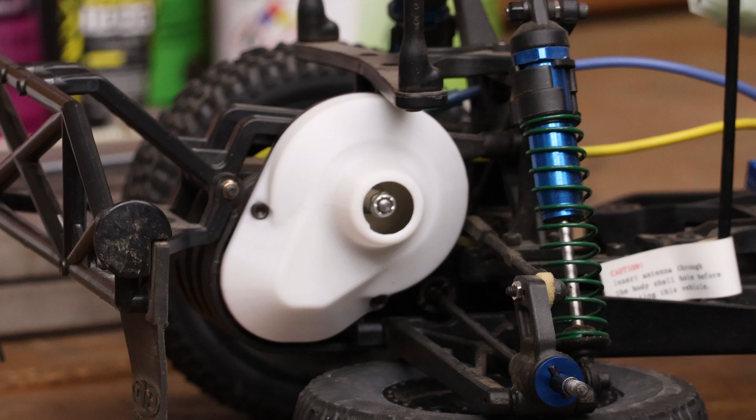So in this video, we are jumping into Fusion. We're going to be doing the CAD portion of our design, getting a 3D part that we can print, and then put it back on this RC10 truck. Now this is probably a tricky part, and I get a lot of comments about how do I reverse engineer this part. And when we're looking at scan data, it can sometimes be a little tricky. So what we're doing today is we're not reverse engineering a part, but we are going to design a part that fits and replaces the original.

Now, it might seem like we don't need to get a fully detailed or a highly detailed scan when we're doing something like this, but to have the best data possible when we go into CAD is always helpful. So we're going to be diving in, we're going to be making our new part, and at the very end of this, we'll put it on the truck and cross our fingers and hope it fits. So without further ado, let's go ahead and hop into Fusion and start modeling.

All right, so now we're in Fusion and we're going to begin modeling a cover. One of the benefits that we have here is that we're not trying to exactly replicate the cover because we have one. We don't need to. So we can use it as a guide and make sure that we have enough room or clearance for all the things underneath it. Now, luckily for us, these covers are actually pretty loose in tolerance. There's no seal or gasket or anything. It keeps dust out, but it's not going to keep water or anything from really getting in there.

So we're just going to use it as a loose guide, and we'll start by going to our mesh tools and inserting a mesh, selecting from the computer, and finding the OBJ. So again, we can use OBJ, we can use an STL or 3MF. We cannot use the PLY, so make sure that if you are using RevoScan that you don't save it as a PLY if you're planning on bringing it into Fusion. While we can use PLYs for certain things, the inserting a mesh is not one of them.

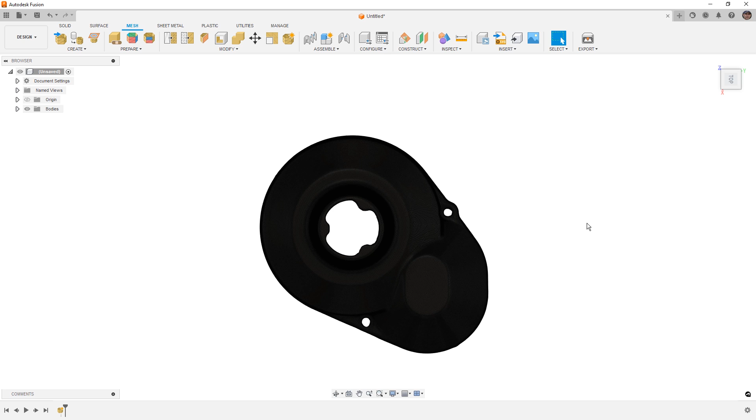Now, in reality, you would want to make sure that you have it perfectly aligned to your coordinate system. Because this part is revolved, this portion here, we would want to be centered about the origin. And this bottom edge is essentially flat. So if we look at it from the top, we would want this edge to be horizontal, or some orientation of that. I'm going to hit Control and 4 on the keyboard to get rid of my edge display, just so we can see what's going on.

So right now, this edge is essentially vertical. This is essentially vertical. And this is roughly the orientation that it is on the truck. So we can either keep it like this, but center this about the origin, or we can try to rotate it so that this bottom edge is straight. Either is perfectly fine. But I'm going to turn my origin on, see where it is.

And I'm also going to create a new sketch. Now, the reason I want to create a new sketch on this top plane is this is going to give me some references. So I'm going to put a circle here. I don't really care what the size is. And I'm also going to put a horizontal line.

Now, if you want to follow along, I am going to include a Fusion file in the description of the video here that has the mesh inserted, but not rotated or moved at all. So if you're trying to follow along with this, you can. My guess is you're probably not going to, but feel free to if you want.

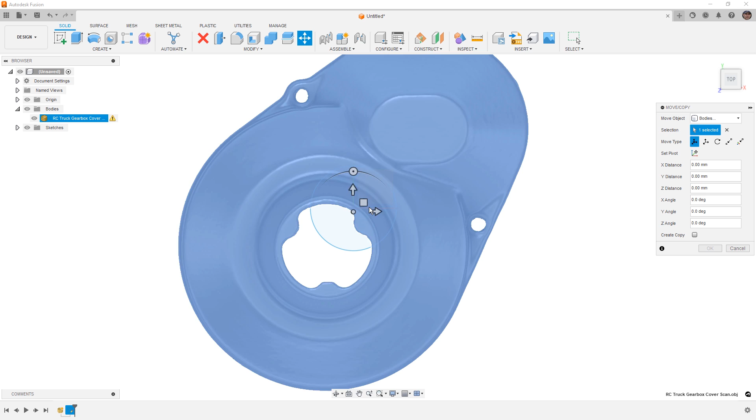So what I'm going to do with this line is I'm going to drag it up and see how well it aligns here. And it actually looks pretty darn good. And I'm going to drag this one up and see how that aligns. And that actually looks pretty good as well. So I think with this orientation, I'm going to go ahead and keep it, but I do want to move the mesh. So what I'm going to do is go to Bodies, select this, and use Move Copy. And I want to move it so that that circle is essentially centered on that object.

Doesn't have to be perfect. Again, with RC cars, the tolerances are fairly loose. All the suspension pivots and all that stuff, they have a lot of play in them. It's not like we're designing a highly engineered part here, but this is going to get us close enough.

And the main reason that we want to do this, and I can go back and delete that sketch. I actually don't really need it. We didn't attach to it at all. We only used it for a visual reference, so I don't need to keep it in the design. But now we have our object centered at the origin. Now there's another part to this that we need to make sure we understand. It's not really in the right location.

We have our coordinate system here, but again, I'm going to create a sketch. I'm going to use a horizontal line, and I'm going to put this as a midpoint at the origin. And again, I'm just going to use it as a loose reference, move copy, and bring this down. And the main thing I'm looking for here is I want to make sure that the bottom is flat, and right now it's not. You can see that it's just going below here and it's just above here.

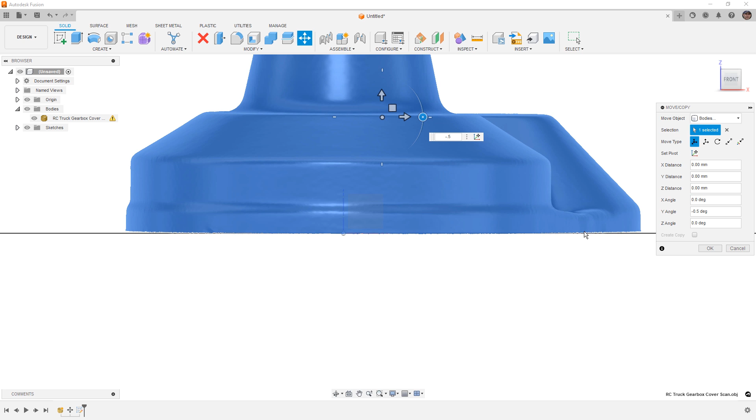So one thing we can do is we can rotate it. I'm going to try to go a full degree, and it looks like negative, and that's a bit too much. So we can try negative half a degree, and let's make sure we got a negative here. And that looks pretty good. You can see the cut's not perfect, but that actually looks pretty consistent here. So I'm going to say okay. And I don't need that sketch anymore.

And I'm going to do this one more time. So from this view, I'm going to go ahead and create a line. Again, horizontal. Select the origin, make it midpoint. And then we're going to select our object and say move copy. Now for this one, I'm actually going to reset the pivot point at the origin because I don't want it to be rotating about some point up here. I want it to be rotating about where it's touching or crossing the origin.

So if I try half a degree here, again, it looks like it's negative. That gets me pretty close. So from that orientation, it looks pretty good. From this orientation, it should still look pretty good. Remember, we did kind of a manual cut across the bottom, so it's not going to be perfect, but this at least gets us pretty close. So I'm going to turn my origin back off. Now the object is centered, and we can move forward with our design.

So I'm going to do a quick save, and I need to pick the right location. And we're going to call this RC Truck Gearbox Cover Design. So now that it's here, there are a couple things that we can do. We can use things like mesh section sketches, and we can get information off of this. But again, the only thing we need this for is just sort of a rough approximation.

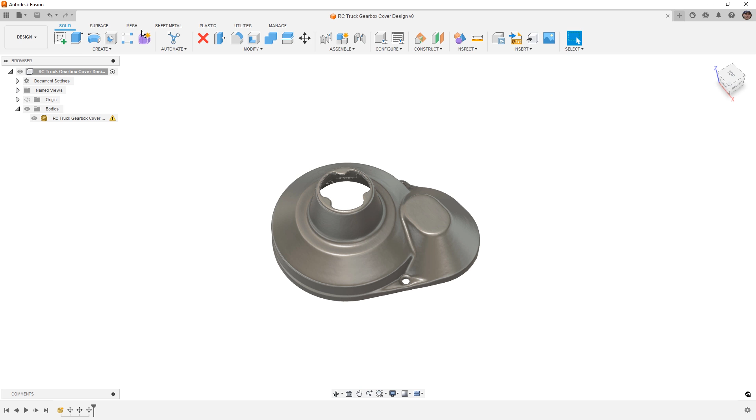So the only thing we might want to use a mesh section sketch for is actually where this intersects with the bottom plane. So on our mesh tools, we're going to create a mesh section sketch off of this body. For the section plane, I'm actually going to go to my origin and select that bottom plane, which is not going to intersect the object because again, it's just barely above.

But if we pull this up just slightly, that should give us a nice section that we can then create a mesh section sketch and apply some things like lines and arcs to them. And then we can push that down to our plane. So what we're going to do is I'm going to hide that. I'm going to go into my sketches, and I want to edit this sketch. Then I can go to Create, Fit Curves to Mesh Section Sketch.

This is where one of our bolts is. So you can see that right there. And this is the other location. It's got a little bit of a bump there. Kind of see that. And the main thing I want to do is I'm going to try to fit a circle to this, and you'll notice that it's not working because it thinks that it needs an entire circle here.

So then we're going to switch to arc, and we can maybe start somewhere about here and put it on there. And that should give us an arc. We can do it again on the other side if we want. But if we hide our mesh section, we should have an arc. And you can see how close that center point of the arcs are to the origin. So that's a pretty good sign.

So again, this is going to be a loose approximation, but we can use these tools such as fit curves for a straight line, and we can put maybe a straight line over here, and we can do another one. So we'll say, okay, we'll repeat that command, and we'll maybe do another line here. Okay, we'll repeat that command, and then we'll do an arc. Maybe we'll just do an arc section up here.

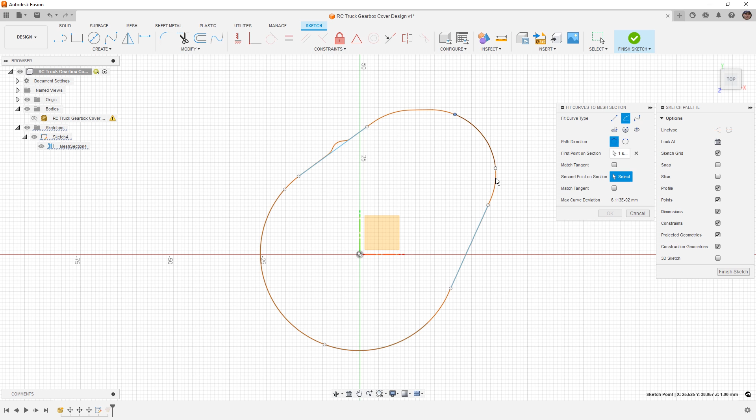And again, if I hide the mesh section sketch, now what I'm starting to do is build that profile, build that outline. Now, if we bring our mesh back, we do have a flat spot right here. So we might want to use a straight line and just try to fit a straight line here and say, okay. Now, this is obviously not the full profile, but the benefit of doing this is now we can do things like extend this out. We can extend all these lines out further, especially if we lock them in place.

So if you select the line and use the lock, and we'll do the same thing here, and we hit escape, that leaves the endpoints free and we can carry them out. So we can sort of pull these out. We can do this one here and this one here. And then if we bring our mesh back, you should see that those straight line sections are now in line with the rest of the geometry.

Now with the holes, these are relatively small. Again, they're about 2.75, 2.8 millimeters, about 0.11 inches. We can do a mesh section sketch and try to fit something there. But in reality, again, with the loose tolerances for what we're dealing with, we can probably just visually get it close. And I'll do the same thing down here. Now, for a higher tolerance part, we would definitely want to measure it. But for this part, I think we're okay. Again, I measured it at about 2.8 millimeters.

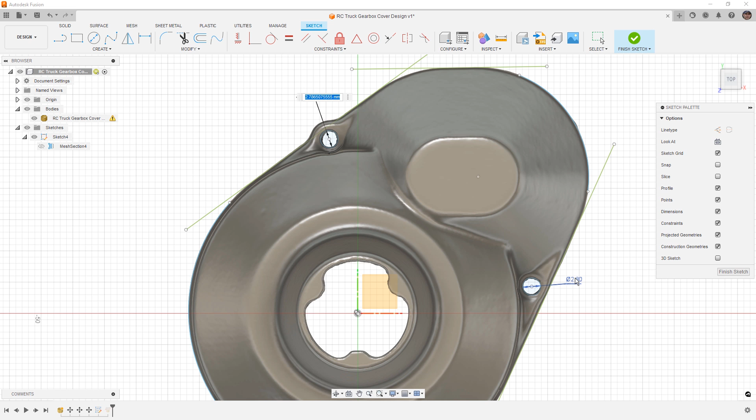And we'll do the same thing up here. I'm going to make this equal to this one because they are the same. And just make sure that they're sort of in the right location. And once I'm happy with their location, I'm going to fix its center point. And same thing down here. I'm going to go ahead and move it around just till I'm happy with it and then fix its center point. And once again, this is just going to be the starting point for our shape. We can always add more to it.

I also want to include this sort of slotted section here. We're going to have to create a plane for where that goes. That's something that we're going to have to do for this upper section as well as maybe where this lip is. But for right now, I just want to include that geometry. So I'm going to go to Create, Slot, and a center slot. I'm just going to manually pick where the centers are and drag it out. And then just move it around until I'm happy with its shape and its location.

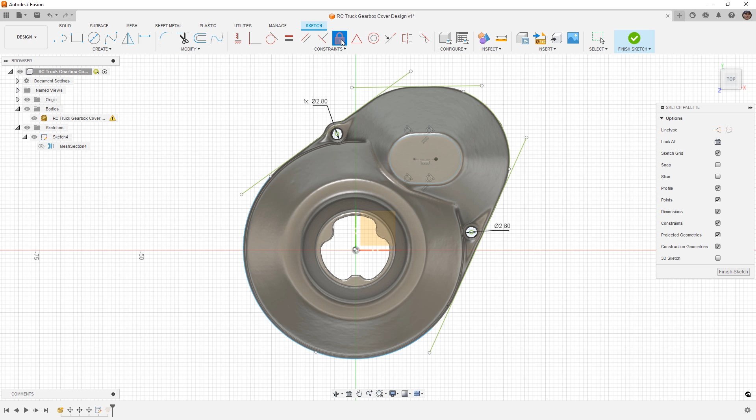You can see this point here is the center point of that arc. So in reality, those two things should be at the same location, and you can see that it's pretty close. So even though we are manually moving things around, we are pretty close to our mark. It's also a good idea for us to lock these in place. When you use mesh section sketches, they are not going to be constrained to anything. A mesh section sketch is essentially just taking a snapshot of where that is in space, and that's what you get. So fixing those in space, even if you allow the ends to float around, is a good rule.

Now, obviously, when we design this, we want these to be tangent, but right now, these are just references for us that we can use to know where things like straight edges are going to be. For right now, I'm not worried about that. The only thing I'm concerned about is the hole locations and some of these other sort of obscure references.

So we're going to put a circle here. I'm going to make sure the circle is at the origin and it's not snapped to some of those others, because we're going to make sure that those other references are truly concentric. And we're going to go to the outside, which will be the outside of that fillet. And it's not perfectly centered, but it's pretty close. I think it's close enough for what we need.

What we could do is move the entire object a little bit more if needed, or instead of having it concentric with the origin, which we just visually sort of positioned it based on that, we could use one of these center points, for example, that one, and see if that's any closer. And use the same center point and bring this one out. And it actually looks a bit closer, so I'm going to use that.

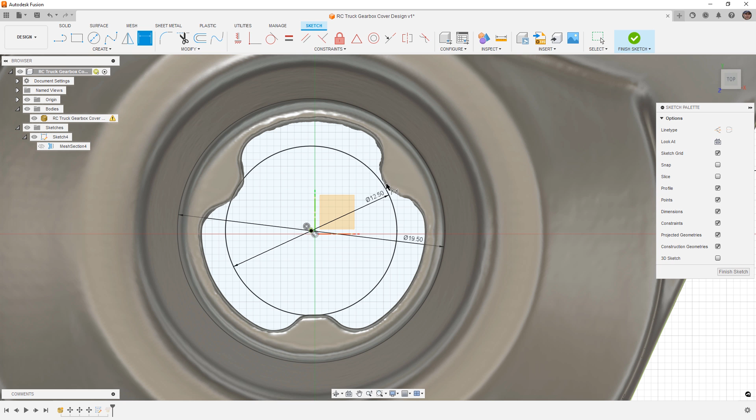I'm going to give it a dimension. 19.5 seems like a good number. And if I can type it in right, we'll say 19.5. This ID for that plug that's going to go in there is going to be about 12.75, maybe 12.5. It's a pretty loose fitting plug, so we only need to worry about the minimum diameter here, the inside diameter, and that's going to be fine.

We could also add a couple of additional references just so we have them in a single sketch. So maybe to this point, it's the outside of that root fillet, and maybe another one to where that face is, and then call that good. So once again, I'm just going to give these diameters, looks like about 27 millimeters, and this one's about 33. Doesn't need to be perfect because, again, we're making our own design, so we don't need it to match.

And the last thing I want to do is give this some dimensions. So 5.75 and maybe an overall length here, 5 millimeters, it seems about right. And I'm happy with that. It's going to be just inside of that fillet. So in reality, that might be 6 millimeters. Now we'd go to the outside of the fillet. Yeah, it looks pretty good. So that's going to be our rough process.

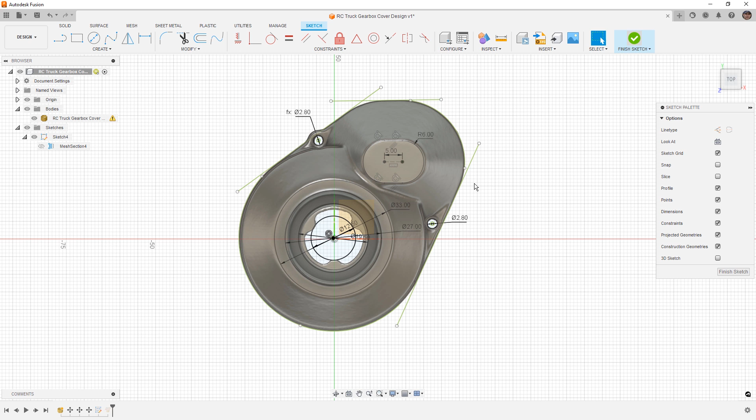I get a lot of questions on how to reverse engineer parts. I would not call this traditional reverse engineering because we're creating an object that just needs to fit in a certain location, but it's not highly toleranced. Now, if this was highly toleranced, what I would do is I would make sure this bottom edge is flat. I would make sure that I had precise locations for those holes.

But because I know that we're talking about loose tolerances, a plastic part that can flex a little bit, and knowing that it's not sealing really anything, there's no gasket or anything that goes on the bottom of this, this is going to be good enough for what we're doing. And I'd probably say for the vast majority of parts that people are trying to create or reverse engineer, this is probably good enough as well, because 3D printing has its own tolerances, and by the time we actually get in to create something like this, those tolerances are going to be lost once we're printing something. So just keep that in mind.

Now, the next step in this process, in order for us to make planes that are actually snapped to something, we would need to go into direct edit mode. Now, we don't have to do this, but I'm just going to at least mention it or show it because in a lot of cases it is pretty helpful. When we go into direct edit mode, this gives us access to actually select individual vertices and triangles. So if we're trying to make a plane, let's say a plane through 3 points, we can select 3 points on this face, and that gives us a plane.

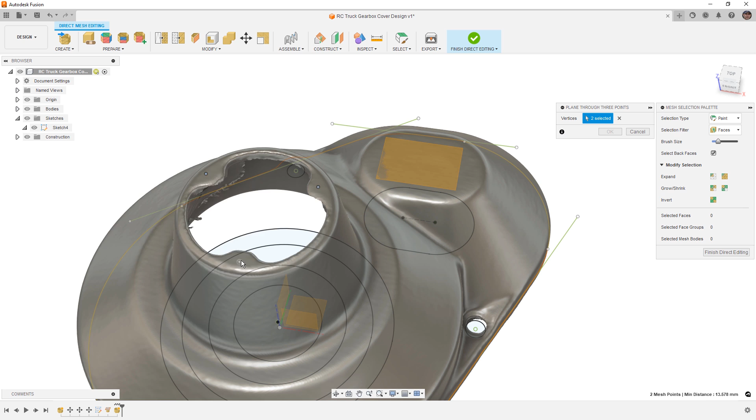Now, the downside to this is that plane is not going to be parallel with our default XY plane. It might be relatively close, but it's probably not going to be perfect. And same thing if we make a plane off the top here. Go ahead and select those. Now we have a plane for the top, probably not going to be perfect. For what we're doing here with this part, it's likely fine for us to just visually estimate where these planes are.

This section here is kind of tapered, so it's probably not going to give me a great result, but that's the process that I would go through if I needed those reference planes. Now, a true mesh editing software, which Fusion is not, we do have direct modeling tools and editing tools for mesh bodies, but a true piece of software that is meant to deal with scan data like this will have options for you to select points and make a plane parallel to another plane.

So for example, if we bring back our XY plane, so we've got that XY plane there, and we measure between that and this plane, you can see that we're about half a degree off. Now, in reality, that is very small. That half a degree is probably fine, but it is a compounding issue because if we go from that plane to the top plane, we're another 0.3 degrees off. And if we take a look at that plane down to another plane, these are just sort of compounding issues. So we're going to eventually get to a point where we're just going to be kind of off with these.

One of the benefits that we have here, though, is now we can say measure from a point, let's say the origin, up to this plane, and we can get a distance. Even though the plane is not perfectly parallel with the bottom, we can say, all right, well, it looks like we're at about 29 millimeters. So we can, with pretty good confidence, say that the overall part is probably 29 millimeters tall. Because 28.799, based on our references, probably 29 to 30 millimeters tall. We can measure it, of course, with calipers, but sometimes you don't have that option because the object's too big or too bulky or just can't measure it. But in this case, that gives us a good reference.

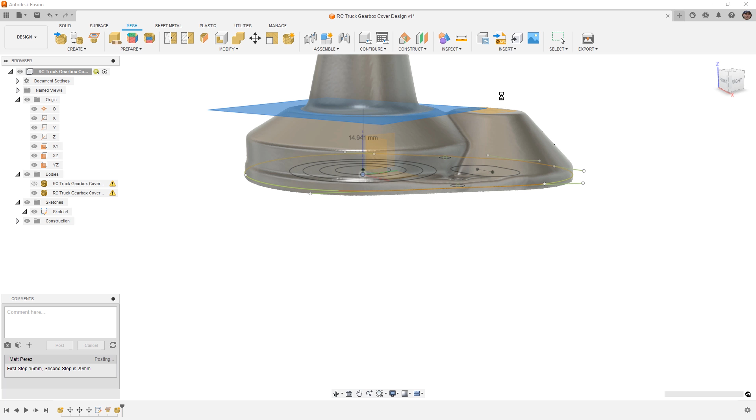So let's go ahead and just do one more quick measure. So again, from the origin point up to this plane, I'm going to hold down the left mouse button because that plane is just under that top mesh. And it looks like 15, so it's a little bit under, but it could just be based on my selection. But that does appear to be just slightly under. So I'm going to go ahead and put ground to face. I'm going to call that 14 millimeters and post that. So it's just nice to have those comments in there, especially when we need to measure stuff.

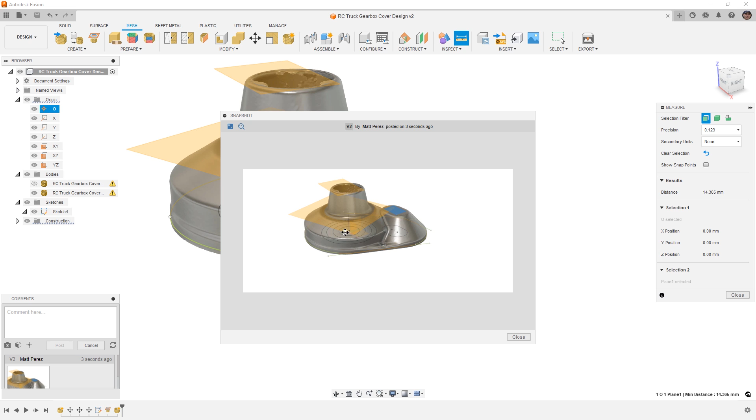When you're making comments in Fusion, you can also grab a screenshot by clicking on the camera icon. And that way you can do things like see the measurement on the screen. So we've got the plane selected. We've got this selected here. And then we can just say, ground to face 14 millimeters. And then when we post that, we'll have that image that we can go back to and we can click on. And depending on how that was taken, if the numbers are visible, it'll bring that image up. We can zoom into it if we need to and fit to screen. But that's just a good way to keep notes inside of a design in Fusion.

So for us, I'm going to hide all of those. Now that I've got some rough dimensions, I'm going to hide the origins. I personally do not like to model with them on. I know a lot of people do. And I'm going to do a quick save so I can stop rotating this around, and then we will begin to model.

So anytime you're modeling a complex shape, and to get started, I'm going to stick pretty close to some of these original shapes so we can see how it's done. Generally, what I would do is I would start with this lower face. So there's a little bit of a lip here, and I want to model that bottom lip. I want to figure out where that thing is.

So I'm going to start by creating a new sketch. This is going to be on my XY plane or my top plane. I'm going to hide the mesh body, and I'm going to use some of these references. So I don't want to bring all of them in, but I'm going to say project this one, project that one, obviously the holes. I'm not worried about anything on the inside yet, and this arc and this line. And then I can hide that original sketch.

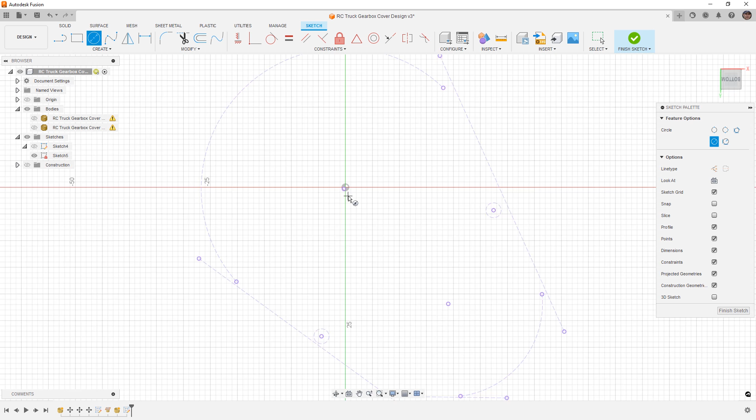And now I've got these. I'm going to grab them, make them all construction, which is X on the keyboard, or you can click construction here. And this is my starting point. Now, obviously, this circle, this arc, did not end up perfectly centered at the origin. And again, that's just because we manually moved it into place. So I'm going to use the center point of that arc, and I want to bring this circle out. This is going to be my reference for adding lines.

I also want to create a circle here. And this is a good starting point. I'm going to create some circles here. So these are going to be snapped exactly to. So I could turn these off. These don't have to be construction, but I'm going to go ahead and make them equal. I'm going to give them a dimension in this sketch of 2.8. Now, because this is going to be a 3D print and tolerance is probably going to be an issue, I can make them a little bit bigger.

And then I'm going to add a second circle, and I'm going to make this one 4.5. If you need to bring the mesh back to get an idea of how big that is, you can see 4.5 is not quite big enough. Let's go ahead and make it 6 millimeters. That looks like it's about right. And then we'll do the same thing over here. Now it looks like this one at about 6 millimeters is a little bit big. So maybe we'll make this one 5, and 5 looks about right.

So basically what I'm looking for is when it hits that edge there, and there is a little bit of a recess here for the head of the screw. That seems to be smaller than 5 millimeters. It's kind of hard to tell, but for our design, we can keep it at 5 and it'll be fine. So with those in play, we'll go ahead and hide this.

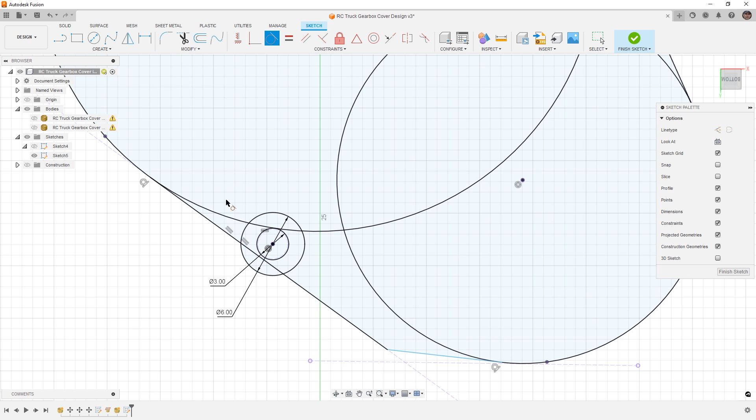I'm going to do the same thing on the other side. Again, I'm just going to snap to the circle. This is a bit different because we've got this horizontal reference. And what I want to do is I want to go to a point out in space, and then I want to go to this circle here. So I'm going to go tangent to this one. I'm going to go tangent to this one. And then I'm going to make this line here horizontal.

And again, what I'm looking for is to be relatively close to those reference lines I brought in. It doesn't have to be perfect. If you want to measure, it's probably going to be less than a degree. Let's say 0.8 degrees. So again, pretty darn close for our loose references. And if we bring this back, that was the straight line, and there looks like there's a large fillet on that corner. That's something we're going to do at the solid level. I'm going to leave the sketch pretty bulky here. And that looks like it's okay.

If we hide this, we now have this pretty big profile here. If you want to clean this up so you don't have to select so many regions, you can. Not really needed in Fusion. And generally when you trim stuff, you'll start to lose references. So you're going to get constraint warnings.

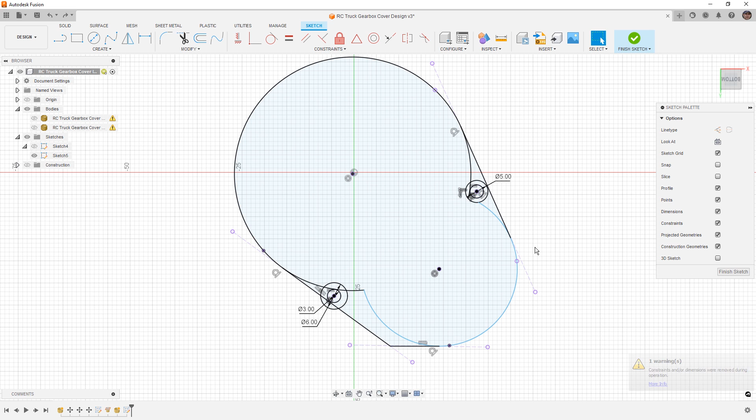And this crosses over so many other little things. So you can see all these little pieces in here. And as soon as we get to a certain point, we're going to start losing those references. So my personal preference is to leave all of those there. If you want to clean this up a bit, I suggest going to the break tool.

So for example, when we use break, it'll allow us to keep all the constraints and all the references, but it'll let us break the lines up basically at their intersections. And what that allows us to do is make it construction. So for example, if I click here and hit escape, that line can now be converted to construction, which means that I don't have to worry about selecting it.

It's a bit of a process to do, and the tool can get hung up, but you may just want to go around and play with that. Again, I don't think it's worth it. I'm okay with just selecting all the profiles, but if you want to, then by all means do that.

So for this, I'm going to bring my design back. I'm going to say extrude, and I want to take all of these sections up. Again, this is where using things like break would be helpful. Make sure that we do select all the regions except for that hole. We want this section as well, section on the outside, and essentially everything but that hole.

Now, if these lines overlap, you do need to pay close attention. We do have a gap there, and we do have a gap there. That looks pretty good. So from the side, we're going to pull this up, and it looks like about 3 millimeters. It's going to be good. I do have my edges off, so Control and 6 will bring the edges back, but that's kind of tough when you're dealing with a mesh.

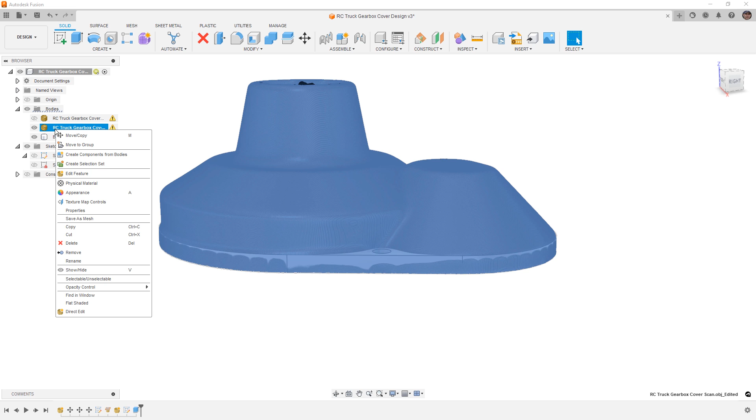One thing you can do to simplify that is go to opacity control and turn the opacity of the mesh down a bit, but it is still very tricky to see. If you don't mind having the edge display off, then you can do that, but the edge display on with mesh bodies can just be a bit much. So I'm going to go ahead and set the opacity back to 100%. But that is one way that you can go about modeling.

One thing I do like to do is change the color of the body. So A on the keyboard for appearance, or you can right click and go to appearance and just make the part that you're designing plastic, translucent, and something that we can see easily. We can go ahead and just drag it on here, make it red. So that way we can kind of see it coming through.

Now, the original body would have been tapered because it's drafted. We don't have to worry about that for 3D printing, but some of these features, like this wall, you can see it's starting to come outside because the original was drafted and tapered. We're going to do a quick save. And then we want to take care of this fillet in the corner.

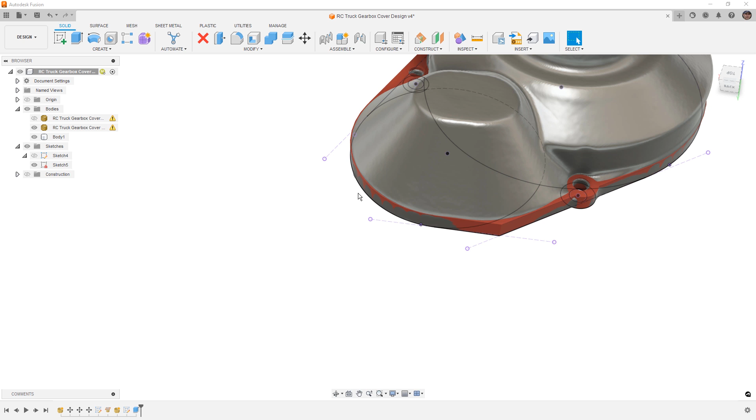So in reality, that's probably going to be the same radius as this, which we didn't actually put a radius value on. If you want to, we can come back in, and I'm going to grab it over here so I know it's right. 17.452. It's pretty obscure. But we're going to add a fillet here. And as we start to drag that in, I'm going to enter 17.452.

One thing that we could also try to do, let's see if this will work. This is untested, but we'll try it. Go back into that feature, and I'm going to click on this dimension, and it won't let me do it. So we'll just leave it at that. So that looks pretty close. Let's go back to home view, and let's make sure we do a quick save.

And remember, initially we talked about how we're not going to replicate this design, and we're going to make our own. Now, this is quite a bit more space than is needed for the clutch setup that's on the RC truck, but I'm going to use this as sort of the bare minimum, because sometimes there are accessories, you can get different clutches and different springs and hardware. So we want to make sure that we don't encroach on the space that is inside of what's here, but we're not going to create the same design.

Now, the base is currently its own solid body, and we're going to keep it that way. But what we want to do is make sure that we have a way that we can reference that geometry. Now, this upper piece here, we're probably going to slap on last. But what I want to do is create basically a surface that is where this is, and just sort of carries across. So the next step for me is going to be to create a plane.

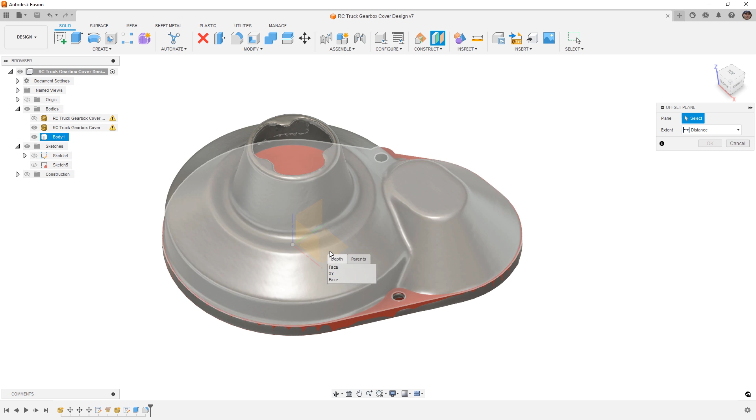I'm going to hold down the left mouse button, select X, Y, and then I want this to come up to, let's see, it's going to be hard, so let's bring the construction folder back on. I want it to be about the location for these, which looks like it's about 15 millimeters. So it'll raise this one up just slightly, make sure all these other ones are hidden, and we'll say okay. So that's going to be a good reference. It's going to be parallel to the base that we created.

Remember that we did hack off a little bit of the bottom of that mesh, but now we can start to build our shape. Now you can do this all with solid tools, but I find that when I'm building complex shapes, I like to go to surface tools because I can work one face at a time. So I'm going to go over to my surface tab, create a new sketch on this plane, and then I need to bring back one of my sketches that has a center reference.

So I'm going to hide the mesh body and hide the solid body for now. And remember, this is just a little bit off, but I want to bring back that reference. So I'm going to make sure that I project it. That's P on the keyboard. And we're going to just create a circle here. You can bring back the original sketch, sketch 4, and I can grab this reference here. So hit escape, bring back sketch 4, double click this, and again, P to project it.

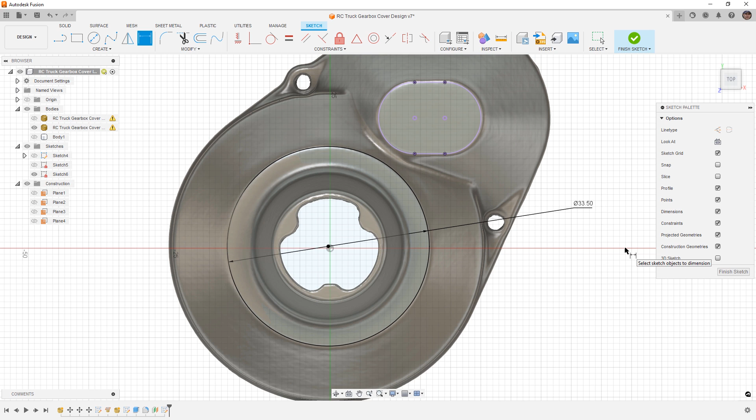And now essentially what we want to do is figure out the size of the shape. Now again, remember, I'm not going to encroach on anything that is smaller than this shape. So I'm going to give it, looks like about 33.5 millimeters. It's going to be the rough size that I need. And now I want to connect these together. So using my line tool, I'm going to go from this one to this one. We'll make this tangent on both sides. And then we're going to do the same thing over here. So just sort of work our way over, make sure that it is connected and tangent, and then we'll use tangent on the back side as well.

So basically what we're going to be doing here is creating a patched surface, a flat surface. Now this can get a little bit tricky when we've got multiple profiles. So if I select patch, I have to select all of these profiles, but when we hit OK, it will be one surface. I'm going to use Control and 6 to bring my edges back. Now we've got a single surface. If I bring back my original thing here, you can see that we've got that surface. I am going to make it a different color. Again, red, so A on the keyboard, just so we can see it a bit better. And this is going to allow me to start building my new shape.

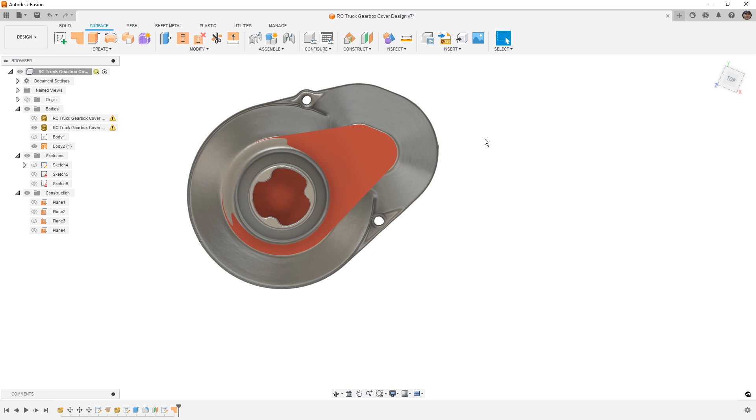Now, the new shape is going to be built on top of that base, the solid, but we're not going to connect to it yet. And the main reason is because we need a thin wall part. Now, when we're 3D printing, we need to think about things like the nozzle size that we have. My machine currently has a 0.4 millimeter nozzle in it, which means I can probably print a 0.2 millimeter wall if I really want to try. Probably not going to go that thin, but that's something that we need to keep in mind. If you're running a 0.6, 0.8 or bigger, you're not going to be able to print those really fine lines. You're going to have to do something a little bit bigger.

So this is the start of our shape. I am going to go back to perspective with ortho. I like to just look at it with perspective a bit better. And I think I'm going to come back and potentially remove those. I have to think about that a little bit. But I want to start by building the outside, and we can always trim some of it away. So looking at our shape, I'm going to bring the solid body back, bring my edges back, so Control and 6.

And we can start by doing something like a loft. We can pick this straight edge here and this straight edge. And I'm just going to keep it like that. If I want to, I can add to the profiles as long as they're connected. So you can see we can start to build that outside shape. We can add to this profile and just kind of play around with it.

We do have the straight section here, but that's not going to work because of this base. We'll have to do something else. And same thing over here. We could actually get away with it on this side over here. And you know what? I'm just going to work my way all the way around with the exception of that side there, just because of that opening.

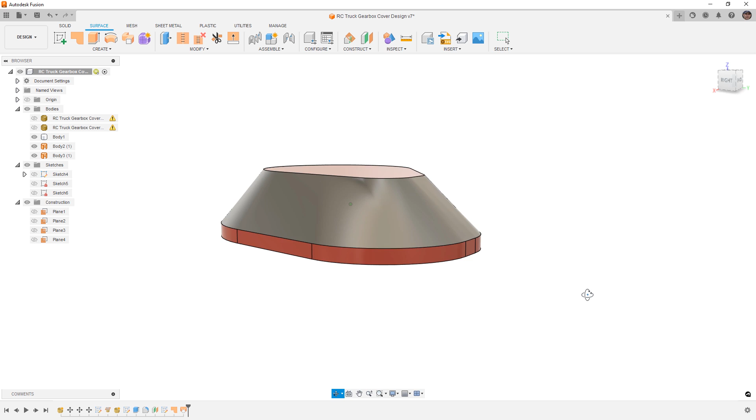So that's probably going to be the new shape. You can see it's getting a little twisted here. That's something that we want to make sure we identify and avoid. If that happens, then what you want to do is hold down Control and get rid of some of these selections. So Control and maybe stop right there. And then we'll do a secondary loft.

And the reason that we want to do that is because now with the secondary loft, we can add a guide rail using that original surface, and we can make sure that one's tangent to carry that shape over. And that'll prevent us from having that sort of weird ripple that happens. And generally that happens, and you can kind of see it over here as well, if you are trying to loft too many edges. Even though we're keeping the same shape, sort of top and bottom, a lot of times it starts to twist in the middle and it doesn't know what to do.

So I'm actually going to go back to that original loft. I'm going to get rid of this arc section and even the straight section here. And we'll start with that. And then I'll loft on the other side as well. Now, again, this is the benefit. This is the reason I like to use surface tools when possible, because it lets us do this one face at a time. It might take a bit more time to get a design, but you don't have to do this as one single solid operation.

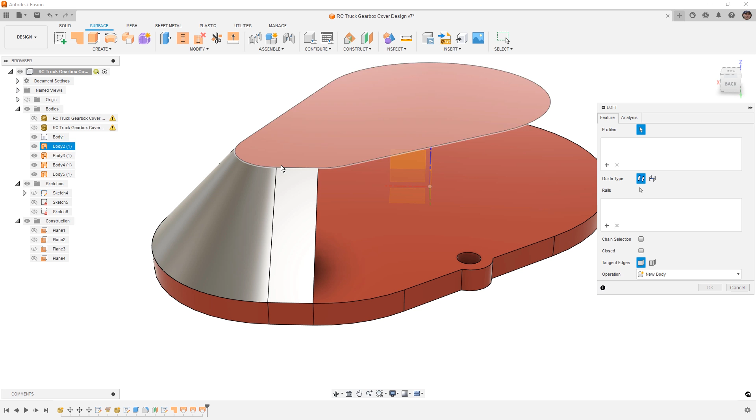Now, sometimes the single solid operation is perfectly fine. It might even give us the exact same result in some cases. But in this case, I want to look at the shape and explore it as I'm building it, rotate it around, see how it responds to the light, and then continue on. Now, anytime you use a command, you can always right click and at the 12 o'clock position, repeat the last command. That's pretty helpful, especially when doing the same thing over and over again, like a loft.

I'm going to use tangency. Now, this one is where it gets a little tricky. You can kind of see it's not staying straight. It's doing this sort of like wrinkle. And it's just because of how much it's wrapping around. So I am probably going to avoid that. So I'm going to hit cancel.

I want to come over here and go to my solid tools. If I hit delete when I'm on surface tools, that'll actually turn the base into a surface, which might be okay. But what I want to do is hit delete here to get rid of that hole, because I want to create an edge that goes straight here that I can use to build the rest of that loft. That way I can control tangency on both sides. So it may take a little time.

Then I'm going to create a sketch on this face, bring it up. We use our line tool, which is L on the keyboard. And then we will split face. So grab the top face. Our tool is just going to be that line. Doesn't really matter if it extends because we snapped to those endpoints. And now you can see we've got this edge.

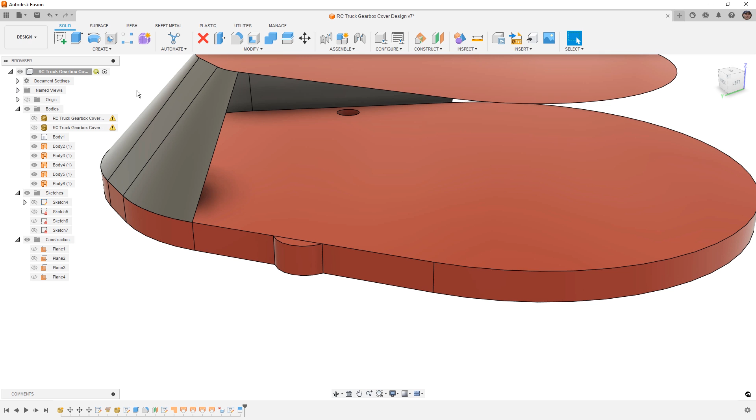So if we go back to our surface tools and we use a loft, we're going to go from there. And then we're going to carry this across all three of those. And then we're going to add our guide curve over here and make sure that it's tangent. Now, because everything's straight, tangency is probably not going to do very much here, but it is good practice to make sure you are carrying the curvature across those edges.

I'm going to take a quick second to knit all these together or stitch them together. While it's not required, it is helpful to have just a single surface body when you're doing that. And now we got the surface on top and the surface here. We could also connect those together, but I'm going to leave them apart for right now. And then we can try to build the other side. Now, because we have essentially a closed profile, we can use patch. I'm going to turn off enable chaining because I want to select the top, side, bottom, and this other side.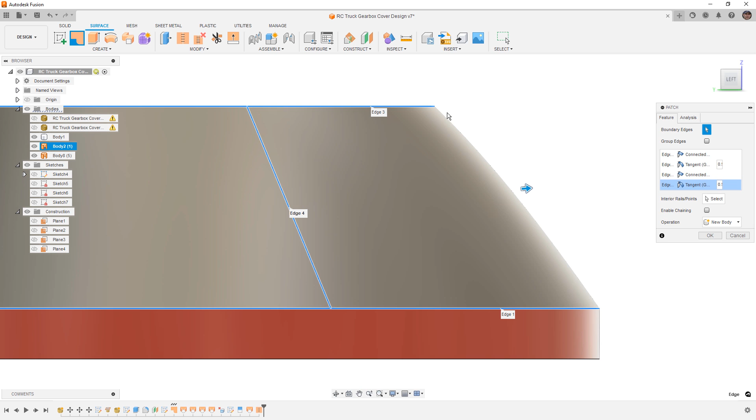And then for edge 2 and edge 4, I'm going to hit tangent here and see if that cleans up the shape a little bit. It's still looking kind of rounded, which is not what I'm going for. You can see that it's not straight. It's got kind of that bulge to it. So what this tells me is I likely want to split this up a bit more.

Now, this is a true arc, and so is the bottom here. So we really shouldn't have a big issue here. There are some other things that we can do. If we go into our loft tool, and let's try this, see if it works. We can use the tangent edge option and closed, and sometimes that'll straighten it out. Let's just look at it from this side. It looks okay now.

And the tangent edge option, basically what this is going to allow us to do is it's going to keep all of the tangent edges. So if it's trying to put one in the middle that we weren't seeing, we would be able to see that. You'll also note that the closed option is going to prevent us from using tangency inputs. So essentially what it's doing is it's creating a surface with the minimal amount of influence. Now, because everything else is straight, it's actually going to connect just fine.

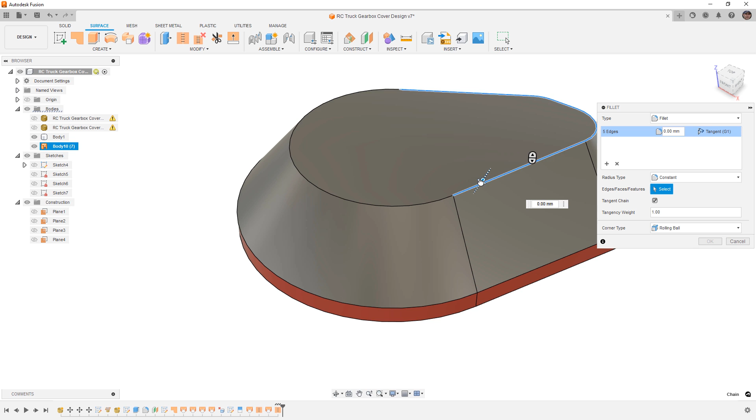But you may notice an issue if you try to do something like apply a fillet. So let's try this, stitch all these together, hit F on the keyboard and see if the fillet carries across that edge. You see it does. And if I hit Control, it's not letting me select that edge, which means it likely does have tangency and it does carry across. So I think this is going to be an okay solution for us.

But sometimes when you try to loft too many profiles or too big of an area together, especially if the top and the bottom profiles are not exactly the same shape, in this case they are and we still have trouble, you may need to just work on some alternate methods. So I'm liking that shape. I think it's okay. I'm not going to do the fillet for now because I'm not ready to round things off. But we also do want to make sure that we have enough coverage.

Now you can already see that this has gone inside of where the original case is. But one thing that's different here is I like the way that this shape is turning out. I'm going to bring this back to center, Control 4 to hide my edges. I like the way that the shape is working out as opposed to the original where it sort of dipped down and came back up. I like the fact that this looks a bit more like what a gearbox would probably look like. So I'm going to continue on with this, and then I'm going to add the secondary shape back here. And then we're going to use some surface tools to stitch them together.

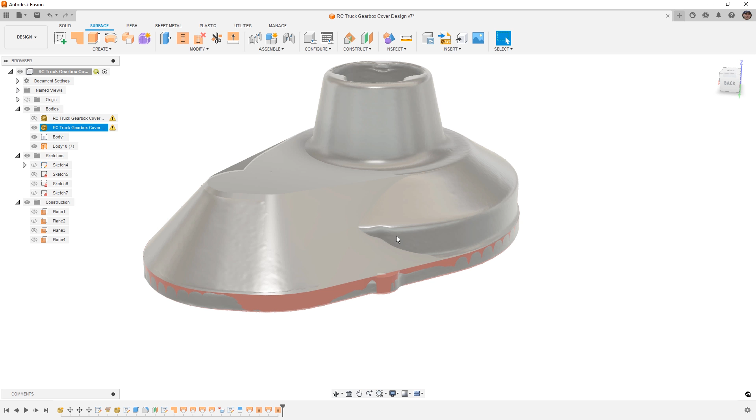So what I want to do is I'm going to hide that mesh and bring my edges back. I really don't like to model without the edges on. And then I'm going to hide the surface temporarily, and I'm going to start a new sketch. So I want to create a circle at the center of this. So remember its point is not at the origin because it's a little bit off. And I want it to be exactly the same size because we don't have to deal with draft in this case. We're not worried about manufacturing this thing with injection molding.

I'm going to make this arc and this one equal and then simply extrude it. Now the main reason for this is because I want this edge to be continuous as it goes up. So I'm going to bring this back. I'm going to extrude it as a surface. I don't want to extrude it as a solid, but I'm going to bring it up to about where that gearbox was, maybe just a little bit higher, and say okay.

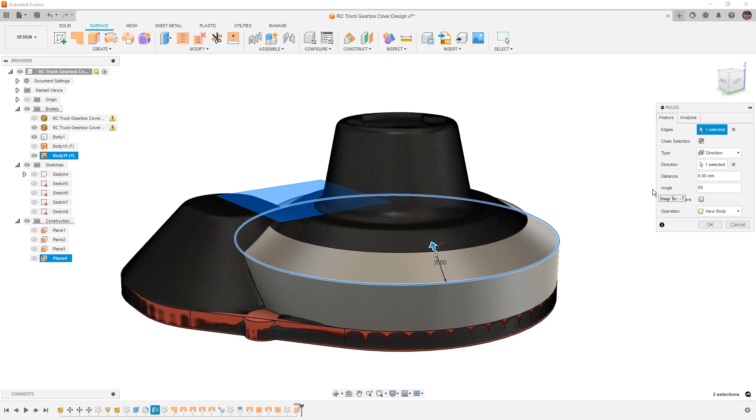And then next I'm going to use a ruled surface from that same edge. And this time the ruled surface is going to go toward a direction. I'm going to pick the direction as that last plane we created and begin pulling this up. And then we're going to taper it inwards. Let's try negative 20 degrees. Looks like it's going to be positive. And let's try 45. Maybe even steeper, 60. All right, it looks like 60 is getting pretty close. Now all I'm trying to do here is extend past that plane. Now ruled surface will allow us to create a new surface based on an edge selection.

When we use something like extend, a lot of times it'll be very similar. However, extend will connect it to the original surface. And in this case, I just want this new one. So let's hide that and let's bring this back. So the tricky part here is this is falling outside of this edge here.

So if we want it to exactly match and come to that shape, really what we need to do instead of a ruled surface is loft it to a circle that exactly matches that. So I'm going to delete ruled. I'm going to come back up here and create a sketch. Again, I'm just going to draw a circle here, and I'm going to use concentric to make sure that it's concentric with this, and then equal to make sure that they are exactly the same size.

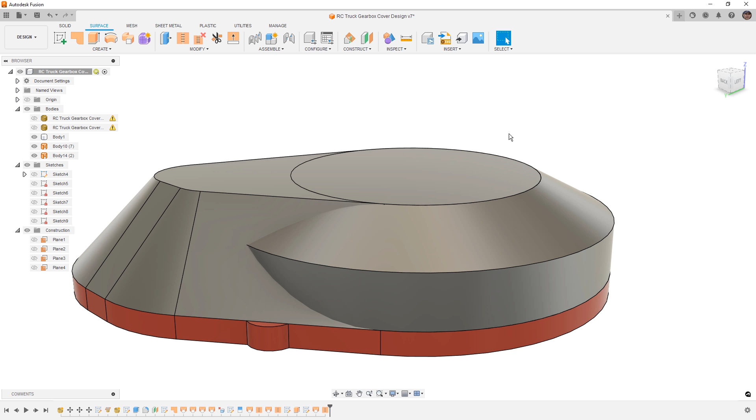And now we can just loft between the two. So we're going to go from this edge up to this, and now it's going to perfectly meet that edge. We'll say okay. I'm going to stitch these two together so that they are one single surface. And now we're left with the challenge of combining these two things together to either make a solid body or to get rid of the overlap. So basically what's happening on the inside of this is we've got these overlapping surfaces.

Now trim can work if we want it to. We can also use things like split body. Some of those tools will be the same. So for example, if that's the body to split, and this other one is my splitting tool, sometimes it'll work, but sometimes when they actually share tangency, like at this upper edge, because that shape wraps around, it's problematic. So my suggestion would be to patch the bottom of this big one off here, and then we're going to use boundary fill.

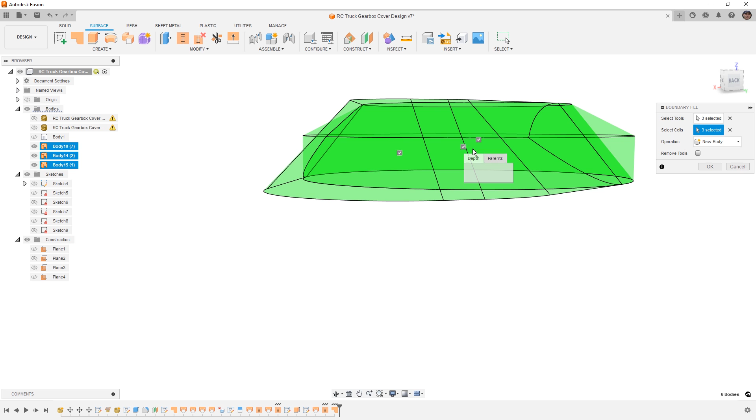So with boundary fill, I'm going to select all three surfaces, and then I'm going to go to my select cells. Now, boundary fill has been sort of broken for a while, and it looks like in the recent update they fixed it. And when I say broken, basically a lot of these checkboxes would be overlapping each other, so you'd have to hold down the left mouse button, and you get sort of this empty menu, which was really tricky. So for example, if I hold it here, we would have three things in this menu, and they don't have a name because they're just these sort of empty checkboxes. But it looks like in one of the recent updates it's been fixed.

But basically what we're doing here is we're selecting those three separate surfaces, and boundary fill will let us fill the volume inside of them. So we're going to say new body. We're going to not remove the tools. We want to keep them just in case. So we'll say okay. And now we should be left with a solid body. But you'll notice that something weird happened. It left this sort of shell here. So we're going to go back to boundary fill, and it looks like I accidentally deselected that checkbox. And for whatever reason, it does not like that.

So here's what we're going to do. Delete boundary fill. It changed the opacity of those surfaces. It's just something that it does. We're going to stitch the bottom surface and top surface together. That makes that a solid body. And then I'm going to go ahead and go to opacity and see if we can bring that back up. Then I'm going to patch this one to top. I'm going to go to my marking menu to OK, 3 o'clock position, 12 o'clock position to redo. We'll stitch these together. And now we have a second solid body.

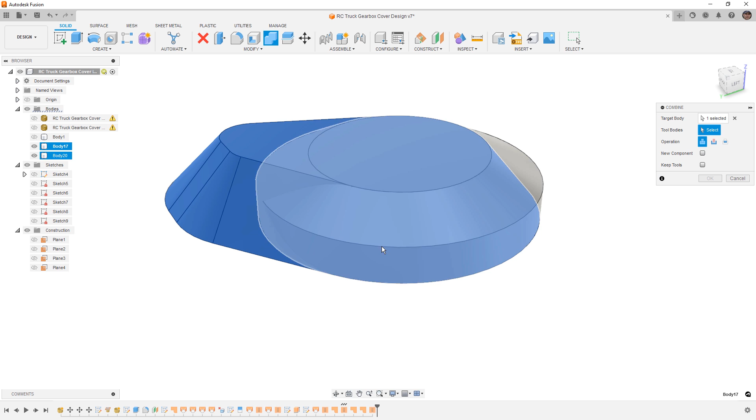And so now we can join these two together. So we'll go to combine and select one, and then the other as the tool, say OK. And now we put them together as a single solid body. So there are going to be times where you have to pick a different tool because the one you're trying to use isn't behaving. That often happens with surfaces, especially when they're sharing sort of overlapping sections.

So in this case, I'm going to go back to home view, do a quick save just so we don't lose any work. And I want to bring back the gear cover. So we want to take a look at the mesh again and just kind of see where we're at.

So far, everything looks like it's pretty close to being outside. We may be a little bit inside the shape here, but that's so minor that it's not a big deal. And then all we really need is this extension on the top, and it needs to be the right size so that we can push the default plug in there. So Control 4, and I think it's looking pretty good.

One thing I want to caution you on is at some point we're going to have to shell this thing, which basically means that we're going to be at the mercy of Fusion to see if this thing can even be shelled. So I'm going to try it right now just to see. And I'm going to give it a 0.4 millimeter, and it looks like it's shelling it okay.

If we first add some fillets, so let's go ahead and add a fillet here. That's way too big. Let's say 2 millimeters. And let's try to add a fillet to the top. This is going to get tricky because of these sections here. So I'm going to try to combine them. Let's say 2 millimeters. And say okay. And now if we shell, all of those fillets are larger than the size that we're trying, which is 0.4 millimeters. So it should not have a problem.

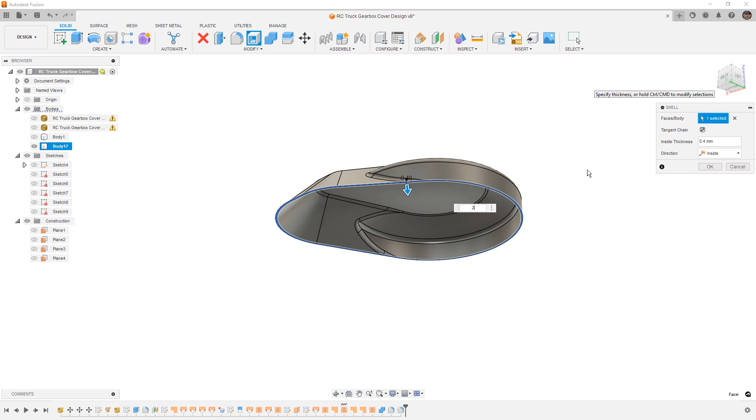Now we can go back and we can use things like a conic definition or chord length for the fillet rather than a radius value. And the reason for that is because the radius value is a consistent radius. However, if the angle of faces changes, you're going to get a steeper or a thicker fillet in those areas.

Now, this actually, surprisingly, it was able to do it. Obviously, it's not a perfect result, but it was able to get to the point where all of that went away. If I go to 1 millimeter, this is obviously much easier. It can calculate it a lot quicker because all of those fillets are at least 2 millimeters. So just something to keep in mind before you start adding detail. It's something to think about.

Now, for just a quick test, if we change the radius type to chord length, let's change this to 2 millimeters, see if it can calculate that. Basically what happens when we're using a chord length, we're determining how wide that fillet is, and it's going to make the width of that fillet consistent. Now, with chord length, it doesn't always solve for these complex changes. So you might find that you can't use it, especially if you get into a more complex shape. But let's go ahead and put that 2 millimeter back on there and say okay.

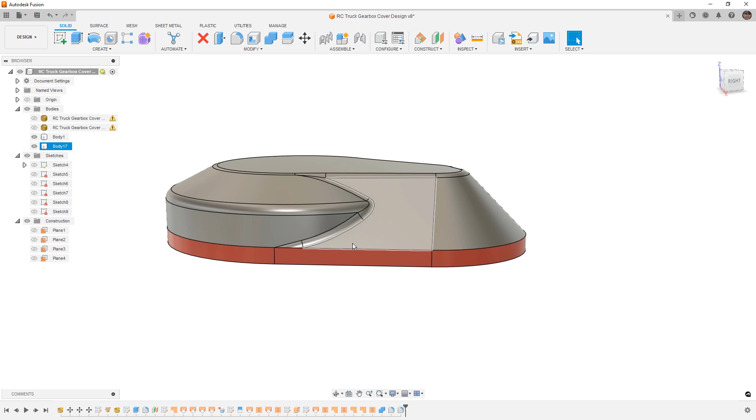So far, pretty good. We are going to have to address this piece individually. So I'll have to put that hole back in it. We're going to have to cut away for the hardware, which is not going to be a big deal. And we may need to do some additional filleting and things like that. Now, I'm going to have to play around with that before we shell it. We're kind of doing this live. I haven't pre-modeled the shape at all. So anytime we run into problems, that's kind of what we're left with here.

But let's go ahead and add this last piece of the puzzle. I am going to make it tapered and sort of follow that same shape. Because the top face is planar and because we're now dealing with a solid, there's not really any point to doing this with a surface.

So I am going to just do a circle. I'm going to make it offset a little bit because I want to make sure that it is concentric with this and don't accidentally snap to the origin. Then I'm going to hit escape and just figure out what size it needs to be. D on the keyboard, it looks like 29 millimeters is about right.

Actually, that's a bit big. So I'm just going to right click on the sketch itself, show the dimensions, Control-4 to hide my edges so I can see it a bit better. And then I don't want it to be on the outside of that fillet. I want it to be on the inside. So 27 looks like right where the root of that fillet is. So it's probably about 25 millimeters.

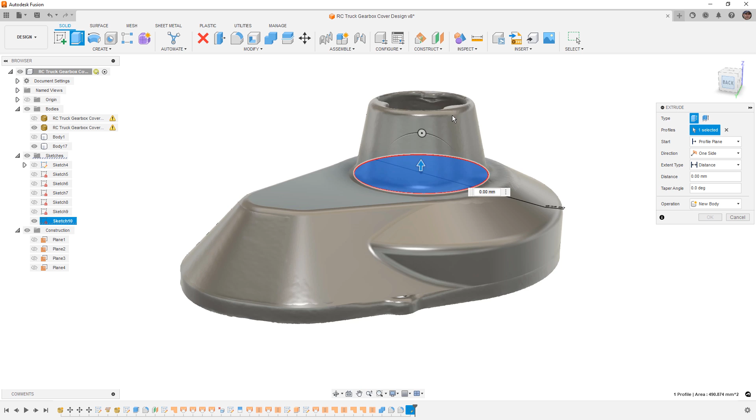So now what we can do is just extrude that. We're going to go up to a plane. I think we made a plane up here, plane 2. But actually, you know what? Let's just go ahead and let's do this manually. We're going to come up, and it looks like, let's see, 14. And we want to taper it in. Let's try 10 degrees, negative.

And let's go a bit more until we see that popping through. So 15 is probably a bit too much. It looks like 12 is okay. It's hard to see because they're both gray, but there's a little bit of the mesh popping through there. So that tells me that we're sort of in the right place. And we're going to join it together.

Then I'm going to do F to fillet. Let's try 2 millimeter. Say okay. And let's hide the mesh and bring our edges back. Last thing I want to do is try a fillet at the base of that. Let's make it a bit bigger. All right. And we do need one more thing here.

So I need to do another sketch on the top. I'm going to do a circle, and then I'm going to bring the mesh back, hide the solid body. And what I want is that circle, let's go ahead and bring that back. That circle needs to be the inside diameter here. Now, the reason for this is we're going to split the top face, and we're going to use that as a selection when we shell it.

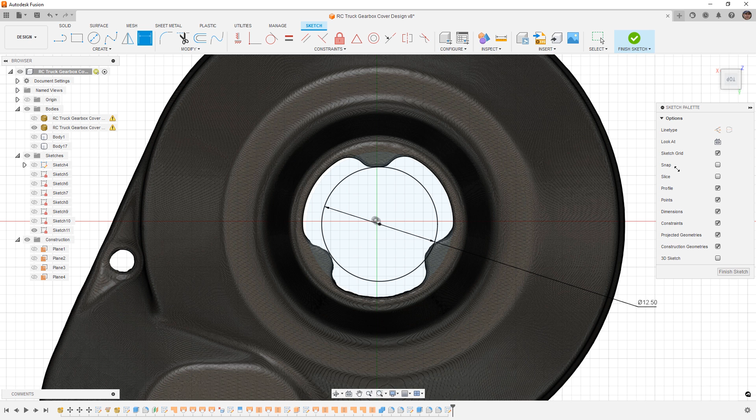So we're going to go ahead and give this a dimension value, looks like about 12.5, maybe 13 millimeters. Yeah, it looks like it's probably about right. So hide the mesh, bring the solid body back, and then we'll use split face. So split the top face using just that, and we'll say okay.

So again, the main reason for this is we're going to use shell, and we're going to select the top face here. And we're going to turn off tangent chain. We want that face and we want this face. And if we go with like 0.5 millimeter, it's pretty thin, that it could potentially have problems if we're printing.

If we go up to 1 millimeter, everything should still build fine. And I think that's probably going to be a good place for us in terms of 3D printing. And that gives us the lip that we need on the inside there. I'm going to say okay. Now we can take another look at this, and we can try to measure from the top to the bottom and see that's 1.3

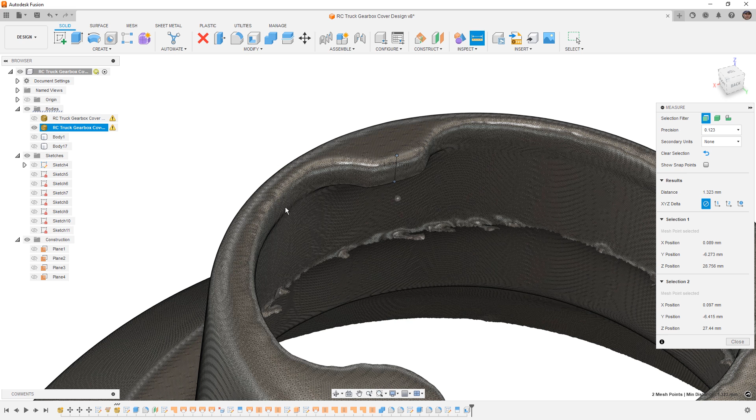-ish millimeters. Now, of course, the scanner is not going to have a great time getting inside of there, but we can also take a look at, let's reset the selection, maybe go from inside to outside. It's coming up at about 1.3. So I think 1.3 is probably the wall thickness of that thing. So I'm going to go back to this body and I'm going to try to do 1.3 millimeters. Might be a bit thick, but it looks okay.

I'm going to put a small chamfer on this top edge, maybe 0.5 millimeter. And then we need to address this piece. But before we do that, let's go ahead and go back to home view and make sure that we do save. So with the base of this, we know that we're working with 1.3 millimeters. I already have a reference for where these holes are, so I'm just going to delete that hole.

And I want to add a fillet to these corners here. So I'm going to give it 2 millimeters. This edge is the one we split. I'm not too worried about it. If you don't like that edge there, I'm going to do Control-Z undo. You can select and delete that face, and Fusion will automatically patch that for you.

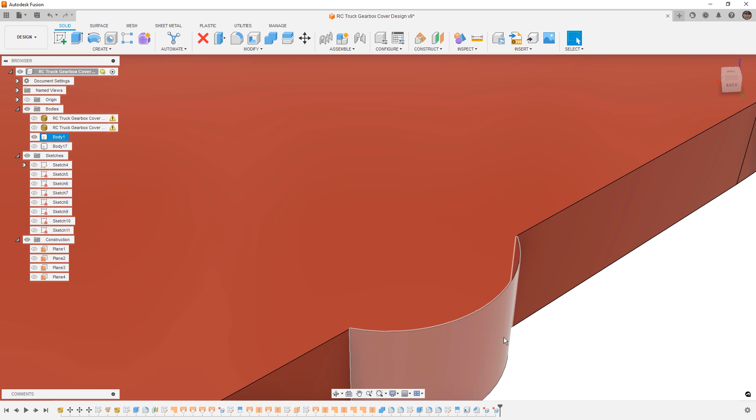In most cases, just make sure that you're in the solid tool set, because if we do that in the surface tools, if I select a face and hit delete, it's just going to convert it to a surface. So you can see basically just got rid of that top face. So you have to make sure that you do that in the solid tools.

Now that we've got that taken out, the next thing that we want to do is bring back a sketch reference for where those holes are, and we're going to do split face. Now, again, this seems a little counterintuitive to do this now, but I want to shell this body out. So we're going to split the top and the bottom, and I'm going to split it with this.

I'm going to bring that sketch back, and we're going to repeat that process. So repeat split face, splitting the top and the bottom. And for this side, we're going to be using that larger sketch there, and then we can hide our sketch. So the reason we did this is because we're going to shell this body, top and bottom, 1.3 millimeters. So we want that thin sort of band or that edge so that it matches our other shape.

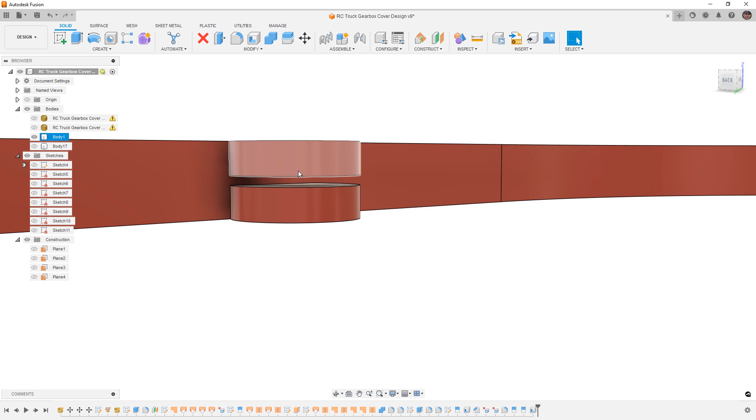Notice that it does some weird stuff in the middle because that's 1.3 millimeters. But we're going to use direct modeling and select that face and hit Q and basically pull that up. And we're going to snap to a point here and say, okay. We'll do the same thing over here. So Q, begin to pull that up and then just snap to a point. And when we do this, that is not going to be a parametric relationship, but it will give us something to work with.

I'm going to add some larger fillets in here. Rotate this around here and here. And let's add 3 millimeters, should be okay. And if we bring the other body back, now what we should have is sections that look like they overlap. Now what we can see here is the 1.3 millimeter wall, because of things like these fillets, it's overlapping a bit. And I don't really love that.

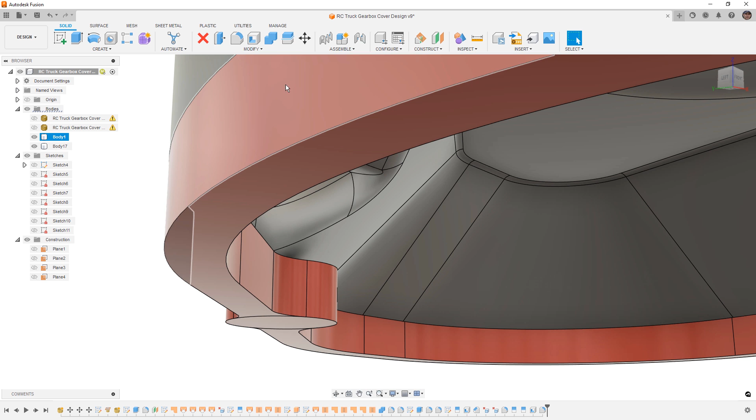So I'm going to change the shell thickness for this one. I'm going to change it to 2 millimeters, make it a bit thicker. And then we don't need these offset faces anymore because the entire vertical height of this extrusion was 3. So if the top is shelled 2 and the bottom is shelled 2, it's still an overlap between them. So we don't have to have that anymore. So now that we have these two, we can combine them. I'm going to join those two together. I'm going to select the red one first so they both become red.

And then we need to extend that top face up. Now this can be tricky to do. What I'm going to do is go to Inspect, Section Analysis, and let's flip that around. I want to be able to see both of those. I'll just rotate it so we can see them both. And let's give this a try. So I'm going to select this top face and hit delete to get rid of those edges. And then I'm going to select it again and hit delete.

And what I'm hoping will happen is Fusion will be able to extrude it up vertically and just patch between them. That is being very wishful. I don't think it's going to work. It might actually fail, and I probably should have saved it first. But it's always worth a try. Now, direct modeling and parametric modeling are a bit different. But you can see it's not really working.

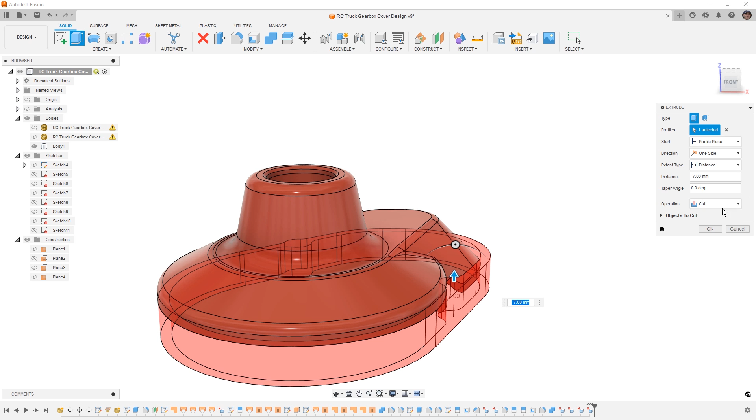So our next solution to this problem is to, well, I'm going to hit delete there and just sort of patch that bottom face. I'm going to take this face, just select it. Because it is planar, we can just extrude from it. And I'm going to extrude it up. And we're going to join them together. Now, when we do this, we obviously don't want to come all the way to here. We just want it to extend to the inside. We can bring it up higher if we need to, but 3 millimeters is basically the original height.

But if we change this to object and select the inside, we may get lucky and be able to extend to it. It doesn't look like it. So because that doesn't work, the other option that we have is to basically build the inside face and then trim everything together. Now, this process probably would have been a little bit easier if the thickness of the base and the thickness of the top was the same. And that's something that we can always try. So we're going to save it, and then we're going to try that because it might be a little bit easier for us. So we're going to hit OK.

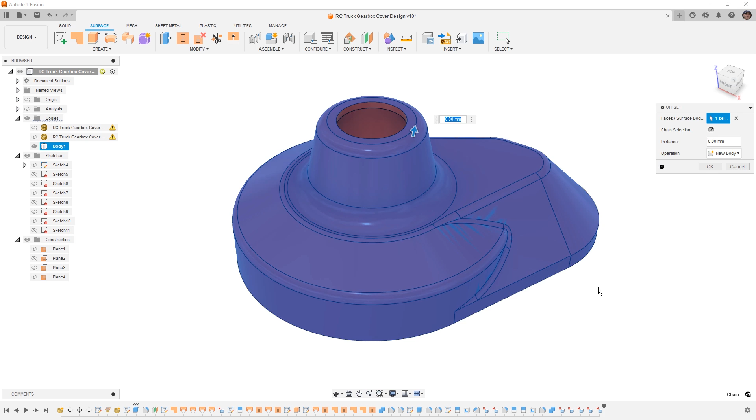Now, the quick way for us to do this is to go to our surface tools, select offset. And because the outside has tangency all the way around with the exception of that chamfer there, what we're able to do is quickly select everything. And I'm going to, actually, you know what? Let's hit cancel first. I'm going to remove this chamfer, again, just using direct modeling tools. And we'll do offset, select the entire thing, shift select the bottom, and then we're going to say OK. I'm going to hide the solid. Go to patch. I'm going to fill in this bottom section here.

It does not like that for some reason. So let's try this. Let's patch that. Okay. And you know what? Let's delete this face and let's just patch the entire bottom here. And we'll patch the top.

Now, sometimes when we're designing, especially when we're using surfaces, it can be a couple steps forward and then a couple steps back. You might find that after you get to the end of a design, you could have done things a bit better. And that might be true. But in some cases, that learning process is very helpful and you just need to push forward after you have that core base shape. So sometimes that's the case. And because I'm not worried about maintaining some sort of parametric relationship between all of these, I'm okay with going back and doing it this way.

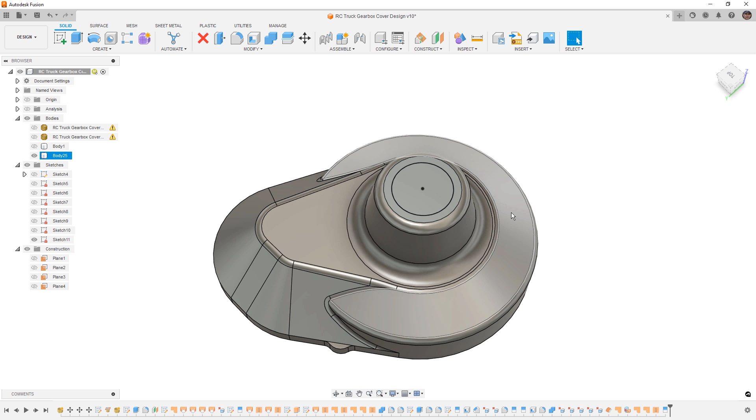So what we're going to try to do is split the bottom again. But this time, what I'm going to do is select the bottom face and offset this -2 millimeters. Bring back Sketch 5. And I'm going to project, so P on the keyboard, both of these edges. And essentially what I'm looking to do is make the inside shape that I want. So this is going to be construction. I'm just going to draw a new one. The reason I'm making it construction is, unfortunately, sometimes that projected geometry doesn't work quite the same as just regular geometry.

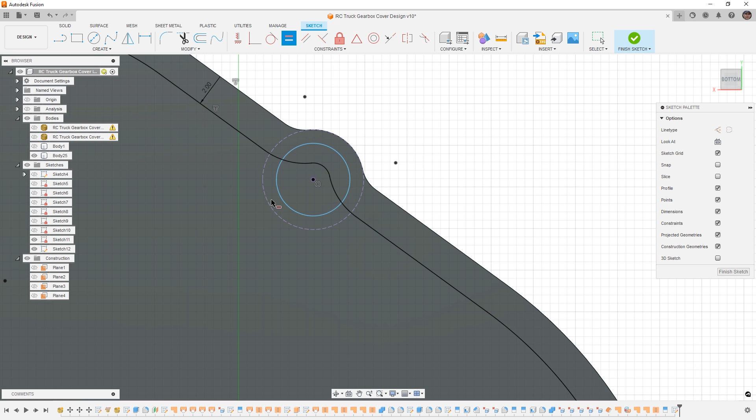I'm going to go ahead and put some lines here, make sure they're tangent, and then just give them a dimension. It's going to be kind of hard to see, but I'm going to put an angle in there. We'll say 45 degrees, and we'll do the same thing over here, 45 degrees. And then we'll work our way over here. So C on the keyboard, circle, we'll make those two equal. And this one's okay. I'm probably just going to fillet between those.

I am going to trim and hit X. And then we'll use the trim tool again and we'll trim away the inside here. So that way we can fillet between those, and we'll do the same thing over here. We'll just get rid of that. All we're really looking to do is split the face. I'm not too worried about constraints at this point. So we're going to finish the sketch, go to split face, split the bottom face, and this should give us an entire chain. And before we even have the possibility of trying to shell this thing, let's go back to the home view and let's do a quick save. Make sure that we don't crash it.

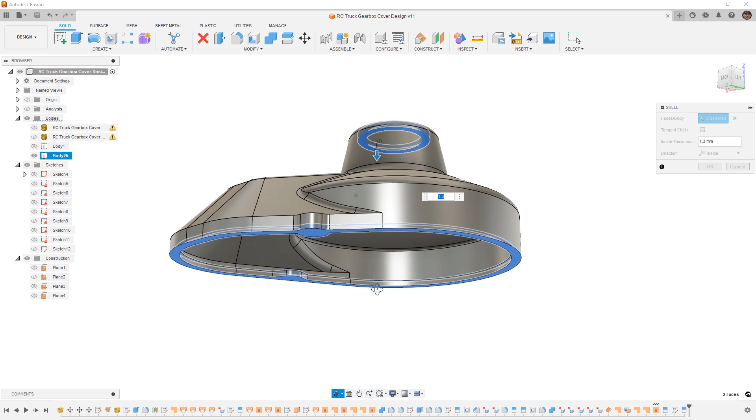Okay, so before we shell this, let's go ahead and try to add a 2 millimeter fillet here. And it doesn't like it because of that transition. So we're going to have to come back and do that afterwards. That's okay. But now let's give this a shot. So we're going to say shell, we want the top and the bottom. Let's start at 1.3 and just see what it looks like. And you can see that it creates that little lip on the inside, which is not what we want. That's kind of what we were trying to avoid anyways.

So let's go ahead and do 2 millimeters and see what it looks like, which I just remembered our fillets are 2 millimeters and it's going to be thinking on that for a while. Hopefully it doesn't crash. And it predictably did not like that. So we're going to go back to 1.3, but I am going to hold down Control and select this face as well. And we're just going to get rid of that face. So this is going to give us the clean wall up to here.

If there are little sections like this, that's because there's a flat on the outside. So you can see that. It's not a big deal because we're going to add bosses back in here, but that gives us that consistent wall thickness that we're looking for with a little bit of extra work and run around that we had. But now we go back to Sketch 5 and we show where those hole locations are. What we can do is we can create those bosses. So we're going to try a couple of things. So bear with me here.

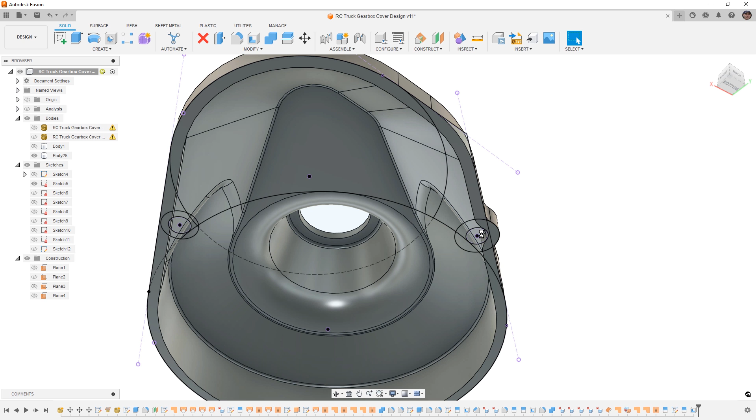We're going to hit extrude. We're going to leave the holes for last because we want to make sure that we just add the holes when we need to. They're going to just complicate things right now. So I'm going to select all the profiles. Go ahead and grab that. I'm going to just do one at a time. And I want to extrude up to object.

We're going to use the to adjacent face to see if that works. And it doesn't look like it does. So instead we'll do distance. And we'll pull this all the way up until it goes through that face. So here's the problem, it's going through that fillet.

So we'll grab that. And what we're going to be doing is building out the shape, trimming it back so that we can join it together. So this is going to be a new body. It's a bit of extra work, and usually you don't have to do this. Sometimes you do, but we need to play around with it a little bit, unfortunately. So I'm going to have that body there, and we're going to work just on this side for right now.

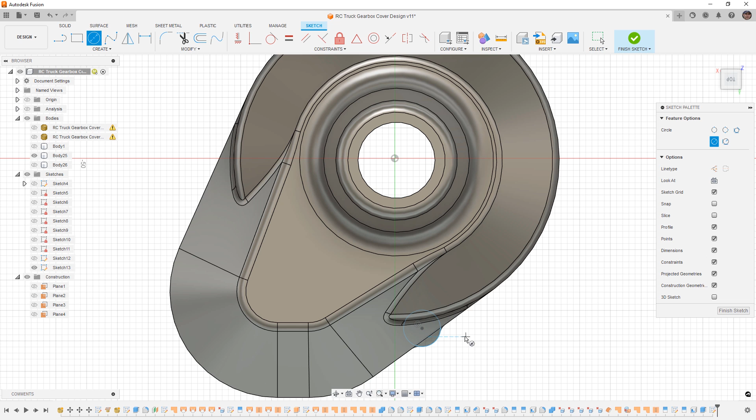Let's go ahead and hide the sketch for a second. And let's hide this second body here. The next thing I'm going to do is create a sketch here and create a circle that matches it. Again, we'll make them equal. And I already have this. This is the same circle that we were just working on. Let's make it a little bit smaller. Make that equal to this one. And then we're going to extrude it up just to see what it cuts away.

Right, so we definitely don't want to cut that much of the design away. So back in this one, we're going to get rid of the equal constraint. For the head of the screw, it actually doesn't need a whole lot. Probably only needs about 4 millimeters. So I'm just going to make a 4 millimeter circle. I'm going to pull this one up and see what it cuts through. So that looks a bit better. We only have to cut into that wall there. We still want it to be a consistent wall thickness.

And this is kind of why we have these two different bodies. If we take a look at this one, this is going to be the solid portion that gets added to the inside, and this is going to be the portion that gets removed. So when we look at this piece, we likely need this to be a bit taller. And we can do that by changing the extrude height. We'll just make it come up a bit more. That way we can build out the geometry we need.

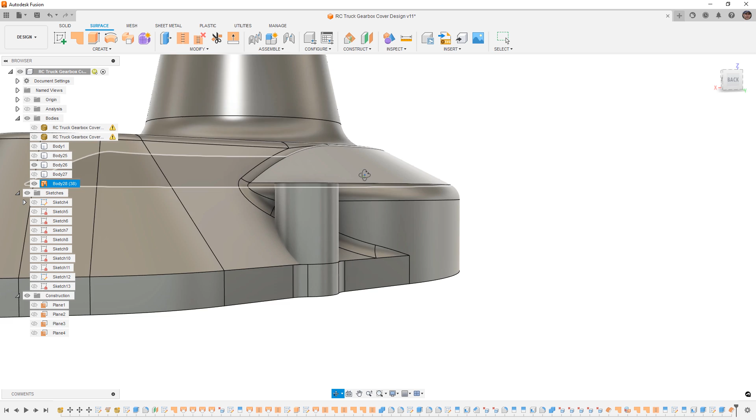Now this piece is going to get cut away from the rest of the solids, but we can use our surface tools and create an offset of the outside of this. And then let's hide this one. Let's hide this one. Now what we're left with is the surface and that solid boss there. What we're going to try to do is split body. We're going to try to split this body with our surface tool. We're going to say okay. And we can see it fails.

So we're going to try this one more time. Split body, we're going to split the solid with this surface tool. We're going to say extend, which probably is going to push it down the bottom. Say okay, and it fails. That's okay, because another way we can do this is turn this into a surface. So delete the top, for example. And I actually want to extend the top a little bit, which again, I can go back and mess with the original extrude.

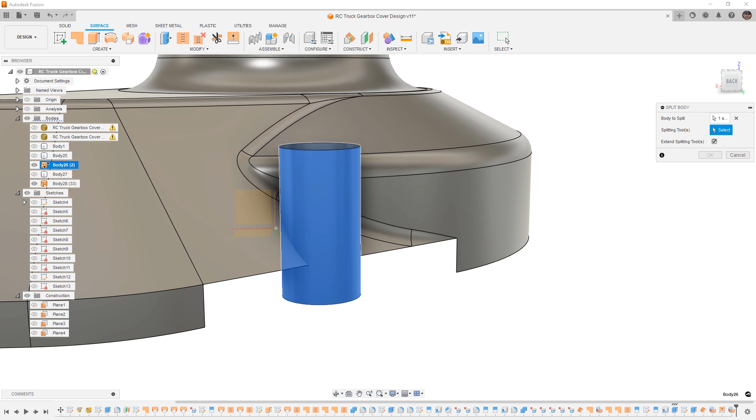I actually want to get rid of this as well because it's just going to complicate things because it's perfectly matching. And then what we're going to do is trim it. So let's go ahead and grab the trim tool. Our trim tool is this body, and we want to get rid of the top piece, but you can see it's not able to extend that out. This is where using something like split body or split face is a bit better because we can select our surface as the splitting tool and allow it to extend, which should extend it here.

If that doesn't work, then we're going to just have to extend it ourselves. Let's hide that for a second. Let's say extend surface. We're going to go tangent. We don't need that fillet. That's only going to cause problems. Turn off tangent chain and select anything that we need here. Pull that out.

Just so long as it can cut through. Remember when we use extend, it's going to combine it with that original surface. So now if we try to trim, our trim tool is this, and the section we want to remove is that upper section. Quite a bit of a pain to get there, but now we have this shape.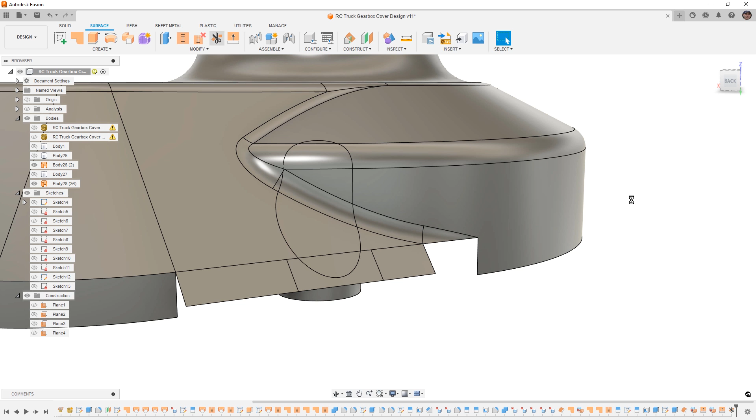And if we were to do trim again, and this time we're going to use that cylinder as our trim tool, and we're going to get rid of the rest of that outside body, we'll have a solid that we can combine to the inside. Now, this is never the ideal workflow. Sometimes when we are dealing with complex shapes, the ideal workflow goes out the window because it's just a bit too complicated, unfortunately. But here, we're going to stitch these together.

We'll say okay. And now we've got this sort of funky shaped solid body. So if we bring back this, we can join these together. And now we've got that boss on the inside. And we've got this one here, which we can remove. So combine, but we'll go to cut, the main body, and this is our tool. And now we've got the space that we need to get that out.

Now, I will say, I don't like the way that that looks. So what I'm going to do is I'm actually going to change this a little bit. And what I mean by that is I want it to be more square. So I'm going to use my line tool. I'm going to come out, over, come back. I need to make sure that these are tangent. And I'm going to project this edge.

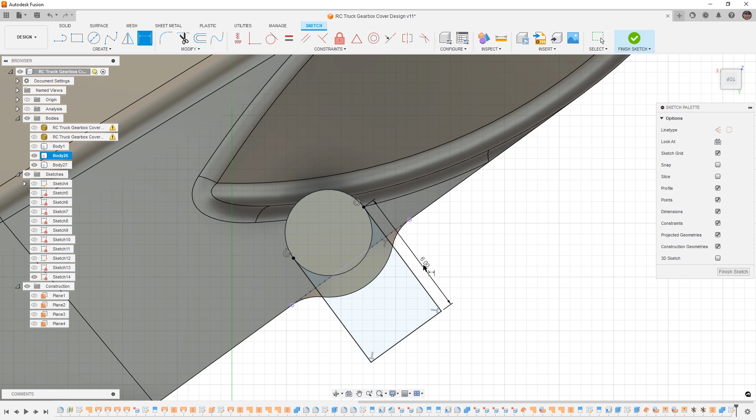So P on the keyboard, make it construction, X on the keyboard, and then make these two perpendicular, make this one perpendicular, and that can kind of be floating out in space. I'm just going to give it a dimension. And so now what we're going to do is I'm going to hide that, and then I'm going to extrude this down to that face and allow it to cut away.

So again, kind of a long roundabout process. We can add a small fillet there if we want, 1 millimeter, and then we can go back and add that hole. So definitely not what I wanted to do in order to make that shape. Sometimes you can get away with being able to just extrude up to a face. If we look at this from the bottom, this one we might have better luck with because it's only hitting that fillet in that face.

But before we try that, again, let's save it. You never want to try something like this, like adding a fillet, shelling a solid body, or doing an extrude up to a face without saving. Now, I see a lot of comments online about people saying Fusion doesn't have great stability. I don't crash Fusion very often. I mean, once a month, a couple times a month, depending on what I'm working on. But it's few and far between. But I just know from experience, even though Fusion does save those intermediate files automatically, we can reopen them in the cache, we generally do not want to be reliant on that.

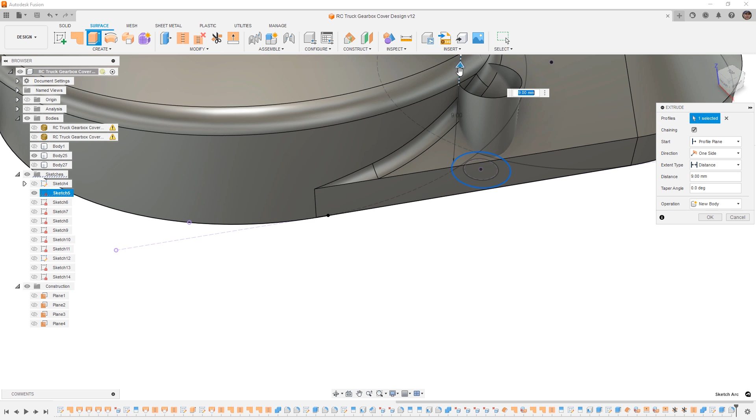So I'm going to go ahead and select all of this. And I'm going to say extrude up to object. That, try to extend the adjacent face. And again, we've got a problem. So we're going to go about this, extruding this surface up, bring it all the way out the top. Just skip the solid step and deleting that face.

So this one's going to be a bit easier simply from the fact that it doesn't cross over this bottom edge here. So when we do an offset of this and we do a trim, it should be pretty straightforward. So trim tool, select offset, and we want to get rid of this upper piece. Then we're going to repeat that. So now the trim tool is this, and we're going to get rid of everything outside of it.

And for some reason that did not work. Oh, that's because we got the solid body there. Let's go back to that last trim. Okay, it worked. I just had the solid body visible, and that's why it looked a bit weird. Now that that's patched off, we can stitch it together, make it a solid, and we can combine it with this.

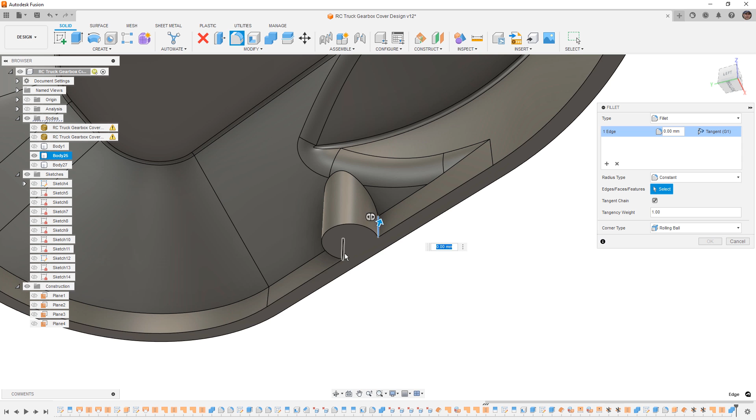Make sure that they are joining together. And once you have it combined, we can add a fillet here, for example. Let's check the other side, do that as well. Add a fillet there and there. And then we can add a small fillet to the inside.

And then on the outside, we're just going to go from the same face height. I'm going to create a sketch, but we'll go back to sketch 5 and just project this. So P on the keyboard. And again, circle, I think we made it 4 millimeters. And then we'll just extrude all that out.

Rotate it around. Again, this one's going to be a bit easier because it doesn't hit quite as much stuff. So that one can be that little recess. If we want it to come out the side, we can. So I could just go back to that sketch and redo that shape. So we'll project this edge. So P on the keyboard, L for my line tool, and we'll do the same thing over here.

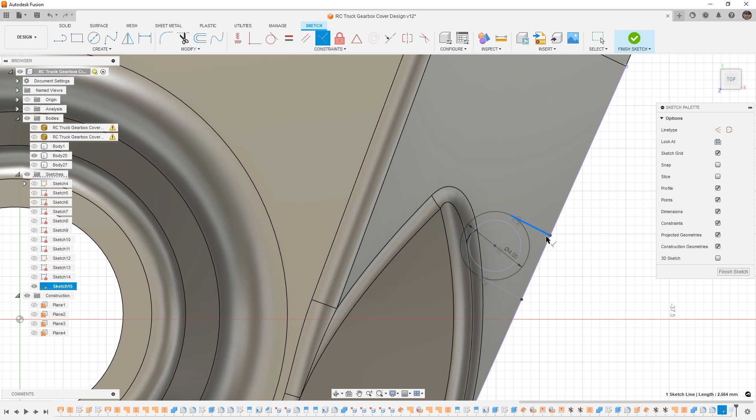So we need to make sure that they are perpendicular. Make sure that one's perpendicular. I'm going to turn that inside one to construction for now. Finish sketch. And then if we edit our extrude, we should be able to hold control and just add that. So again, we'll add a small fillet there, just round it off. And the last thing that we need to do on those is actually extrude the screw holes.

So hold down the left mouse button, select a profile, hold down control, make sure we do have the whole thing, and just pull them up. I'm going to make sure that these just go through all. And there we go. So that should be enough room for those screw holes. Go top view. It could be kind of tight. If we need to, we can make that a little bit bigger.

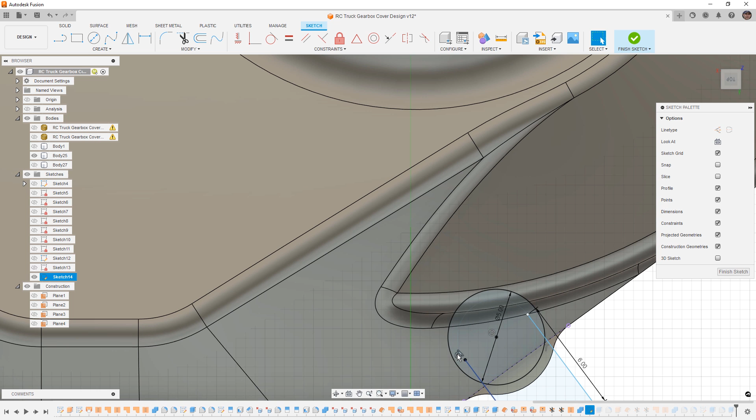So for example, this sketch here. And let's see, maybe make that one 5 millimeters. And then for this one over here, so this. So that was projected, but if we do a circle here and we make that circle 5 millimeters, we can get rid of some of these constraints and just sort of reconnect it. So basically we're just going to connect it over to here, connect it over to there,

and it might give me an error. Let's go ahead and reselect that profile. And it does not like something. Oh, 5's just too big for that inside. Okay. All right, well, let's go ahead. I'm just going to go back a step. And instead of 5, I'm going to make it 4.5. Finish that one.

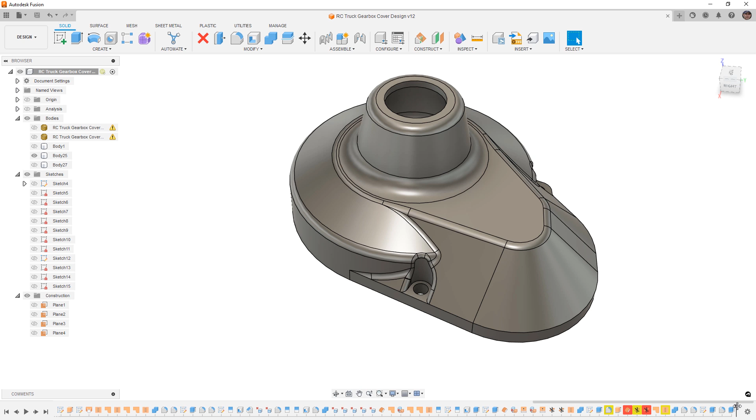And then this one over here. Let's see. This one, 4.5. Well, so this is a good opportunity, unfortunately, for us to fix a few things. So let's go ahead and save. And let's try to decipher what is going on down here. Normally when I have to go back and fix something, sometimes you can get away with just rebuilding. Sometimes selection was just lost, but usually what you want to do is roll back.

And the reason for that is, let's just say, hold down Control. So that's still fine, even though it's giving us a warning. It just needed to be rebuilt because that edge changed. And the reason the edge changed is because I changed that circle. I went from the original projected edge to a completely new one. So now the offset extrude should be fine.

And then let's just take a look at this offset surface. So again, it just needs to be rebuilt. It just lost its original reference. And that's because the outside face is changed. So what this is telling me is likely I could have just hit Control B, which is rebuild. But generally the things that fail and don't rebuild properly are going to be the trims.

The trims, because what ends up happening when a feature rebuilds, sometimes the selection that you made, that's a face on part of a surface body or a solid body, that's the selection that gets lost. And sometimes rebuilding them will flip those, which means that future selections for offsets and stitches and things like that will just be lost. Well, this is probably not a good sign. It's not making any progress on calculating this offset surface.

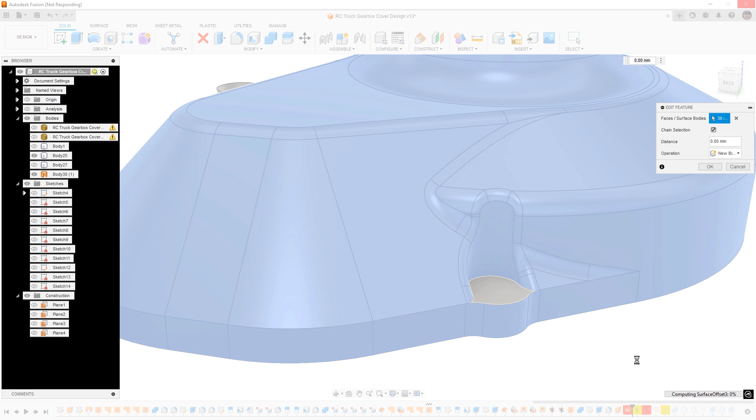If this doesn't crash, may need to roll back and recreate some of these features just simply because of reselecting that face. We'll just have to see. I'm going to let it crank for a little while and we'll see what happens. Well, magically, it did not crash. So in the spirit of things, let's do a save. And then we can move on to try to repair some of the other broken features.

All right, so that surface rebuilt okay. And the next thing would be this trim. So I'm just going to roll back forward. Trim works okay. Second trim should be fine because originally these were just broken because of that offset. So now the patch should be fine on the bottom. Stitching them together because the offset is fixed should be fine.

And then combining them together to make this body should be fine. And now the fillets will have their edges again. Should rebuild okay. Let's see. That looks fine. Double click the mouse wheel to get back. And then these should be no problem.

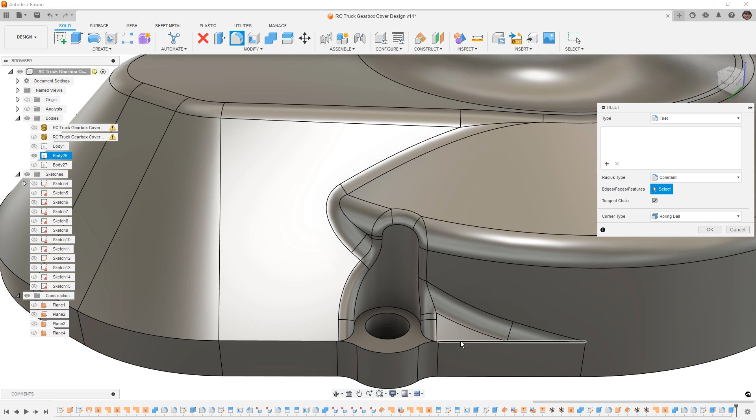And that's the last feature. So, took a little bit extra time, but we were able to get there. The last thing I want to do is I want to try to fillet this edge to see if we can. Yeah, probably not going to like it, but we can maybe do 0.5 millimeter and include that inside edge. Sometimes that will let us get around it.

It's not required, and it's really not going to hurt the 3D print at all, but it just does not like this transition because of that edge there. And I'm not really sure that we need to fix it at all. 3D printing that, it's not going to be a problem. Now, the next thing that we need to think about with this is 3D printing, because it's basically done. We don't have to do anything else.

So we're going to save it, and we need to decide if we're going to print it with support, if we're going to try to print it up on an edge or on a side. Because the critical aspect of this is going to be the holes, I'm going to be printing it in this orientation. So flat on the build plate, but with supports for the inside. Generally, I hate to do that because the supports are oftentimes hard to remove.

But if I flip it over, the chances of that bottom face being flat, which is really the important thing here, there's an aluminum plate on the gearbox and the motor housing, and that's where we need to mount. So that, for me, is the critical aspect. Add a little chamfer here. So that's the part that I really want to keep. So save, and then we're going to take it to a 3D print slicer.

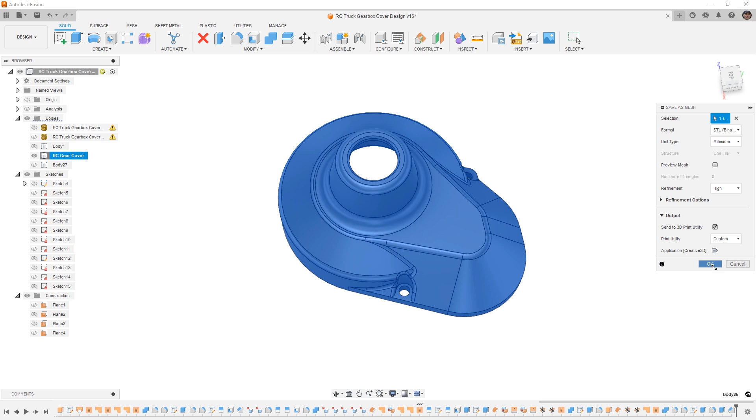For me, I am using a Creality K1 Max. And with that, I have not been using the Fusion slicer in the Manufacture workspace. I was using that a bit when I had an Ender 7. But with the K1 Max, and it runs a bit fast and there are extra fans and things like that, it's much easier for me to just do save as mesh. I'm going to use STL and high refinement and send it over to the Creality Studio or Creality Print.

Now, I have also played with the Orca slicer, and I prefer to use the Creality one personally. And I don't send it over in a network, which a lot of people do. There are some benefits to that. But depending on which printer you're using, which slicer you're using, obviously you can do this in a bunch of different ways. Now, for me, I've got a few options and presets I've already configured.

I am using a Hyper PLA, which is a 1.75 diameter. The Hyper stuff can be printed up to the max speed of the K1 Max, which I generally print somewhere between 300 and 500 millimeters a second for these fast settings. And I do have some refinement settings. So, for example, I've got a fast, no infill, no CDS. Now, for the K1 Max, the CDS is actually a fan that's on the side of the machine that points directly at the build plate.

And what I found, at least with the PLA material, is that it tends to warp and peel up. Now, I went back and forth a bit on a Reddit post that I created, and a lot of people were saying the same thing, that the CDS fan, just turn that off and also bump up the build platform temperature to 60. So we're going to be running that at 60, and we're going to be running no CDS fan or side fan.

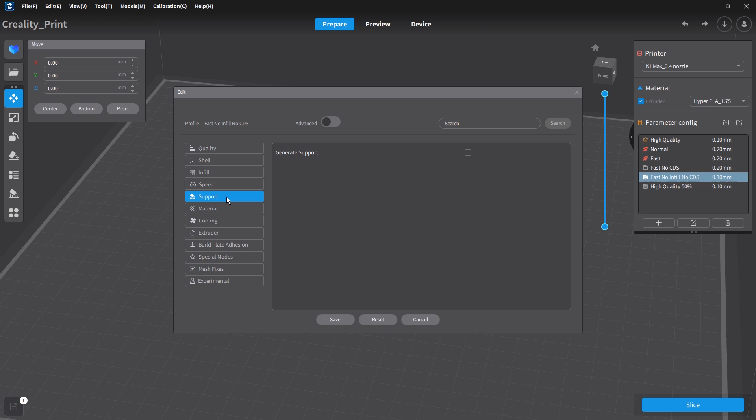Some of the other things that we want to think about is going to be support. Now I'm going to generate support. I'm going to just allow it to generate it on its own and see what that looks like. So we're going to slice it with this. Again, high quality setting, so 0.1 for my layer lines to capture those angles a bit better. We do have a lot of small fillets on this. They generally don't print very well, but I think it's going to be okay for this design.

Now we can see the supports on the inside of this thing. Let's go ahead and just rotate that around a bit. As we go down, that support structure is really just there for that little lip on the inside, which is kind of a pain, but we do need that lip. It's an important part of the structure. And then we want to look at the way the build interacts with that support structure, because the inside face is flat, so we should not have a hard time removing that, but it is inside this tapered structure. So I might be regretting that decision. We'll just have to try it and see.

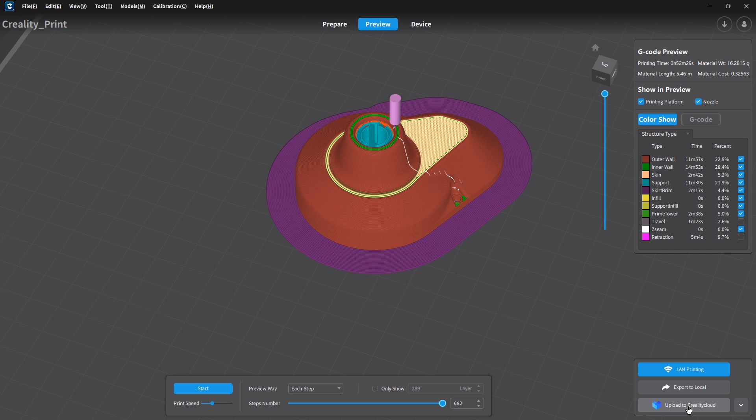You can see that there's brim for not only the outside shape, but also the support structure. So that should keep us pretty locked down. So I'm going to go ahead and run with that. I am playing a little bit of filament chicken on the material that I have on the machine. Hopefully it's enough to finish this off, but let's go ahead and send it to the machine and try to get it to print.

Well, now that we're at the end of our 3-part series going from scan to part design, it's time to reflect on what we've done. Now, at the very start of this, we talked about whether or not you actually need to scan a part. We looked at different variations of ways that we can maybe measure or get a part into 3D. And ultimately, for our design for this transmission or gearbox cover on this RC truck, we opted to scan it. Now, we had to go through and use scan spray, go through a couple variations. We added some small pieces of paper to the turntable to give us a little better chance of getting that feature tracking. And then we made sure we captured more data than we needed.

Now that's always one important thing, is to take your time when you're capturing your scan data, capture a little bit extra just in case you need it, and then you can move into processing that data. Now we of course used RevoScan 5 for this. We can take raw point cloud data out of RevoScan and into something like MeshLab, but for the purposes of most users, you're going to stick within that ecosystem. So we went through, we cleaned up any mesh data that we needed to, and then we moved into Fusion.

Now we used Fusion to create an inspired design. And what I mean by that is we're not truly reverse engineering it. We were using it to make sure that we can create a new part that fits or replaces it. Now the final variation of the part I think looks a little bit better. It's thicker and it's stronger than the original, even though it's just printed out of PLA. Now this is a good use case for the Revopoint Mini2 and other 3D scanners, is to take something that you have, for example, an RC truck or an RC plane, and you want to create a new variation of a part. You can use a 3D scanner to capture that design, bring it into the computer, and design your own variations.